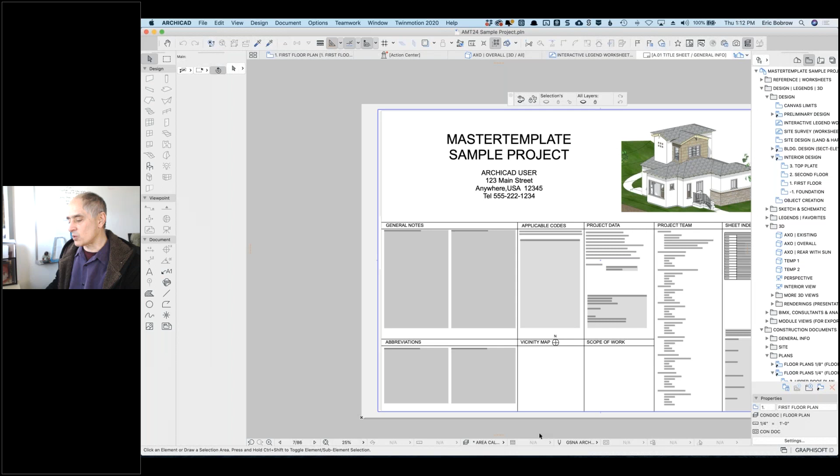What do we have down here? We have a set of interface elements that are common regardless of whether we're in a plan or in a layout, or let's say they are similar. You can see in a layout, some of these things are gray. If we're in 3D, there's also going to be some other things that are gray. So the interface changes depending upon what context you're in.

Now, in the bottom left area, there's some navigation things, like being able to click and zoom in to an area. That's the little plus sign, or click here to fit in window. So these are some navigation tools and some ability to switch your scale. For example, 100%, you can see how it got bigger, and I can have saved views as well.

Now, if you want to rotate your view, you can set the orientation. Let me just zoom out a little bit. If part of the building was on a 45-degree angle or something like that, you could set it graphically. It says enter rotation center point, and maybe I click on 2 points and then rotate them. More often you would take something that's off the angle and rotate it to be square. This allows me to draw with the X and Y related to what's on screen.

Yeah, Eric, I have a new project that I'm going to need this, and I don't know exactly what the angle is, so I can do this manually. I'm assuming, but I would need something in the background. I actually have a site survey, but it doesn't have... well, it would have, yeah, it's going to have one common property line that I could probably use to align with.

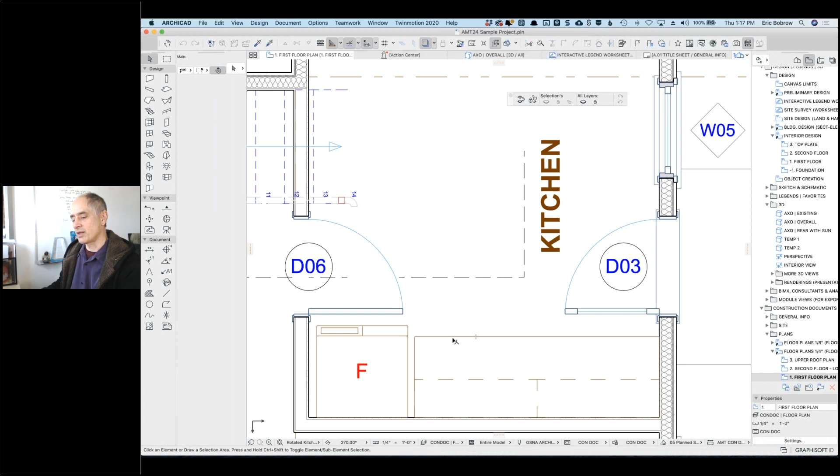Now, by the way, if I do fit-in window now, you can see I am still rotated into this orientation. So the fit-in window will keep the orientation to 270 in this case.

Yeah, I understand. So let me put it back to the kitchen view, which puts me back at the 0 orientation, and then fit in window, just so we see what I'm used to seeing here. Now the rest of the tabs down here, well, there's a scale factor, and right now we're at 1/4 inch to a foot.

And as most of you know, if you were to make this at 1/2 inch to a foot, everything would get twice as big, but the text and other paper elements would not change.

So if I change it to 1/2 inch, look what happens to the marker bubbles and the window and door markers here and the grid markers. They will stay the same size on screen, but the building will get twice as big.

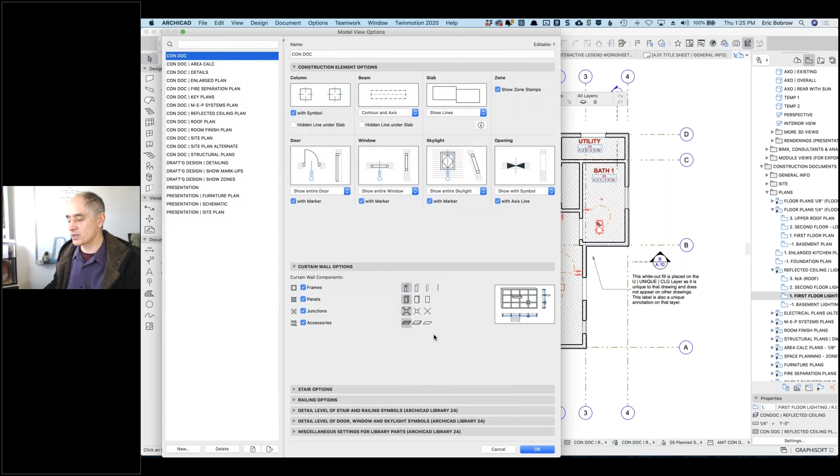Well, let's talk a little bit just as general interface controls. Right now, I've opened up the model view options. I can switch between any of these presets here. Let me just cancel out of this—I can also do that from this little pop-up. You can see we're on the reflected ceiling plan. I can switch it to condoc, and we'll see all of a sudden we're still seeing the ceiling elements, but now we're seeing the door swings, the details of the windows, etc. Now this model view options, while I can open up and just switch to different ones here, I can also modify it.

Maybe for the ceiling plan, I don't know why we'd want to, but maybe with the contour, we say we don't want to show the markers. That's modifying this preset to turn that off or on. So we can modify the presets, or we can select a different preset.

Now, when I select a different preset, like this here, this is just temporary. If I double click on this view, it puts it back to the other style because the view has settings. This view in the list has some settings when I clicked on the settings button, and one of them was model view options, use this style.

Ultimately, Roger, I know you've been around for a long time. You will have worked with model view options, I'm sure, and you certainly have worked with layers there. All of these are incorporated into the view settings. So if you want to create a drawing that looks a certain way and has the right information, typically you're going to create a view with a name that makes sense, so when you look at it in the list, it's easy to understand.

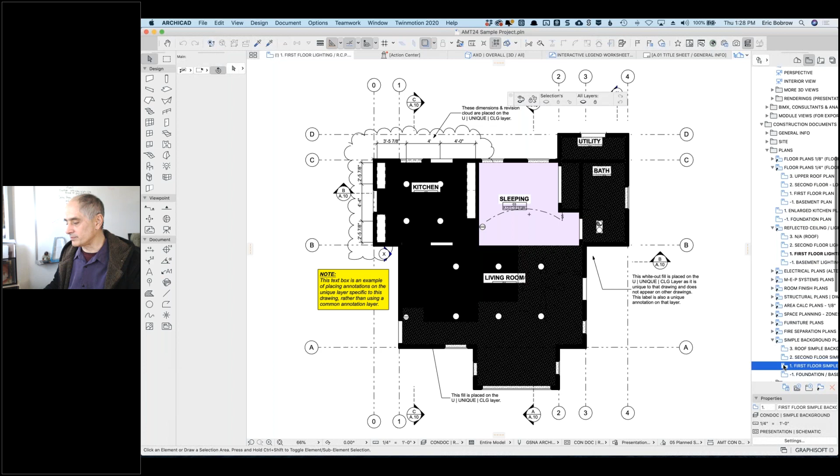But let's look at something that might be a simple background plan. This is another example where this particular view turns on a layer combination that hides most things. It's just intended to show the shell of the building and some of the key structural components.

There, it's got a setting for the graphic override that says make the certain fills just white. It also has some things that change the pen set to blue. That's what gave the blue thing. Now if I just change this to presentation solid, we're going to see another graphic override.

So without going into an extensive explanation of all of the system there, each view defines a bunch of different styles for what to show, how to show it, and scale and other controls. That's what these things down here do. They either give you access to just the dialog box when you click on the icon, or to a choice of one of the dialog choices.

These are manual settings. In other words, you just say, I'd like to see this, I'd like to see that. But when you have a view, and I go back, let's say to the first floor plan view, it set all of these to give us something that makes sense. So does that help clear things up?

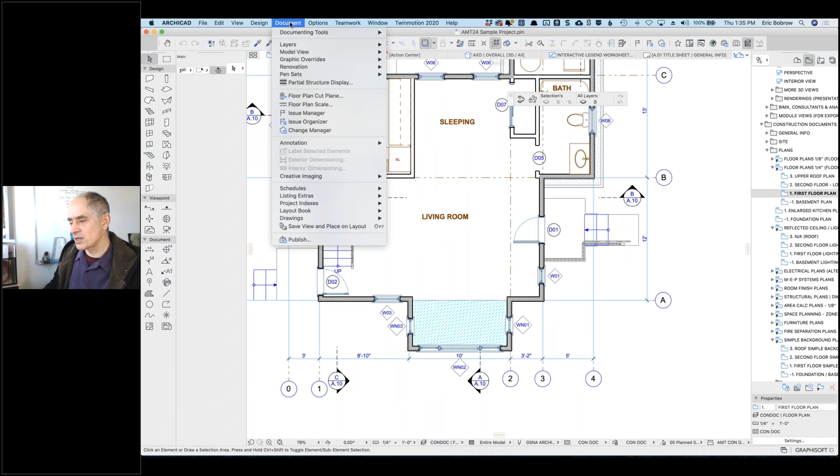And let's see, under document — let's see, it's under view — set rotated grid. There are grids that you can rotate. I'm not sure the rotated view is here. There's also the pop-up.

I'm not sure, but I think those are the main places where we'd look at it. I don't think it's under guidelines or snap, but this is the place where I know you can set that.

Good question, Emil. Now I do see some questions typed in the Slack workspace for our coaching program members that relate to this, so I'll try to take them before I move on to other questions.

Stan says, my site plan was brought in at 0 degrees and I designed within that site plan, but rotated the house plan 1.14 degrees. Whenever I click on any object, it says it is rotated 1.14 degrees, although it is actually normal or 0 to my house plan. Also, I believe there are other anomalies in my sections that may be due to this.

Albert says there may be a better way to initially set this relationship up.

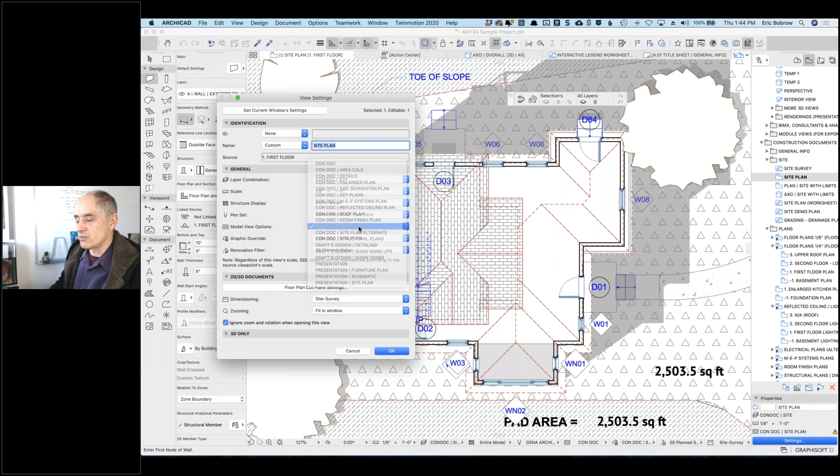You want to set up a view. So for example, I've just manually switched it to condoc. As I do this, look at what happens to the doors and windows. We're seeing all these markers here for them on the site plan, which we wouldn't want. So the site plan has a setting that says the model view option should be specific, designed to work for site plans. And if I say okay, you can see how it switches to this setting. So that's the first answer to the first question you had, which is how to hide or not hide.

Now, you talked about the window and door markers, right? Okay, now section markers are different. Section markers are visible if the layer is turned on. So controlling what is seen can be managed in some cases by layers and in some cases by model view options. And graphic overrides also have a somewhat similar control of how you're seeing things.

So let's just look at the section markers. So section markers are not showing here, right? Why? Because in the layer combination, and I'm using a little icon here to open it up, we're on a layer combination called Condoc Site, and the layers for the markers here are hidden. You can see the eyeball. Whereas on a floor plan, we're showing the section markers and we're showing worksheet markers. When we have an enlarged plan, we may turn some of these off, or we do other things here. It will hide or show the layers.

So the layers are going to control this. Now, what makes a site plan is in part the layers, because we're showing trees and we're showing some graphics indicating shadows, and we're showing some site area information. Those are mainly controlled by layers. The fact that we don't have door and window markers is controlled by the model view options. So that's some things there.

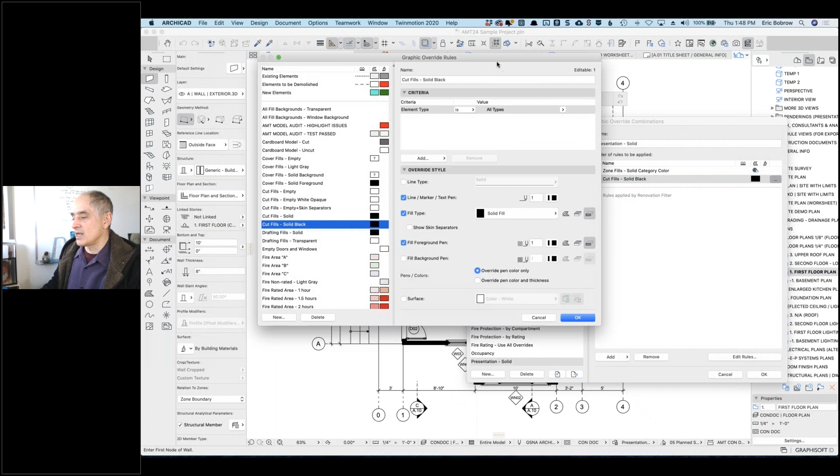Well, if I click on this 3-dot symbol, this is called a graphic override rule, whereas this is a combination of one or more rules. In this rule, it says anything that is drawn that has a fill, let's make it solid, and let's make that solid fill be pen 1 black. So that's what this is.

Now, if I use something like cut fill solid here, this does not override the color. Let me just say, actually, I can switch these to look at them, but it's the combination that's being active. Let me just show you if I change to another combination, we have white model here.

Actually, no, let's see, simplified drawing. Okay, so simplified drawing, this is going to change the cut fills to empty, white, opaque. So they'll be white, but they'll also block anything underneath.

So let me just switch that. So you can see how that had different rules doing things, whereas normally when we're doing a construction document, we have no overrides or just a minimal one about zones. And now we can see that we've got the insulation, etc.

So that's graphic overrides. Now, when we have the renovation filter, plan status says show things normally, but only existing and new elements and not the demo. New construction is overriding things that are new here, and that's what I was demonstrating earlier.

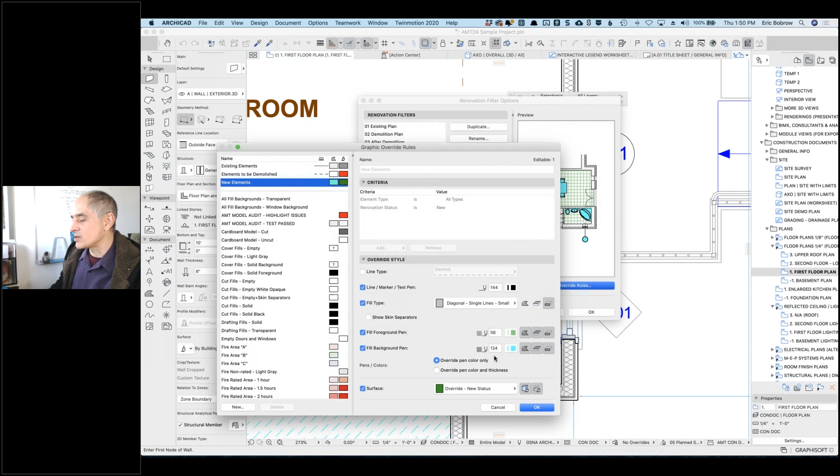So let me just show you how this works. I'll just activate the new construction one saying that I'd like to show the new stuff in a special way. And you can see how it's highlighting that.

Now this new construction here, if I go to graphic override rules, is controlled by this setting. And if I were to make this a different color, let's just go and make it fuchsia or whatever that color is, and say okay, you can see here's the preview and there's the thing there.

So first of all, I'm saying that I'd like to highlight these things or override them in a graphic view. Let me just put this back to something, I think it was probably this one. Was it that? I don't know, it was probably this one here.

All right, so when you changed it, you must have changed it here, and then you went to no overrides. So this is no individual overrides, and this has to do with the phasing that has some overrides. So just put it back to either plan status or existing plan, depending on which way you designated elements. So that fixes that issue.

Okay, now let's see. Oh, yeah, okay. All right, okay.

Okay, so I think we've covered the basic things that you brought up. Is that all right if we move on?

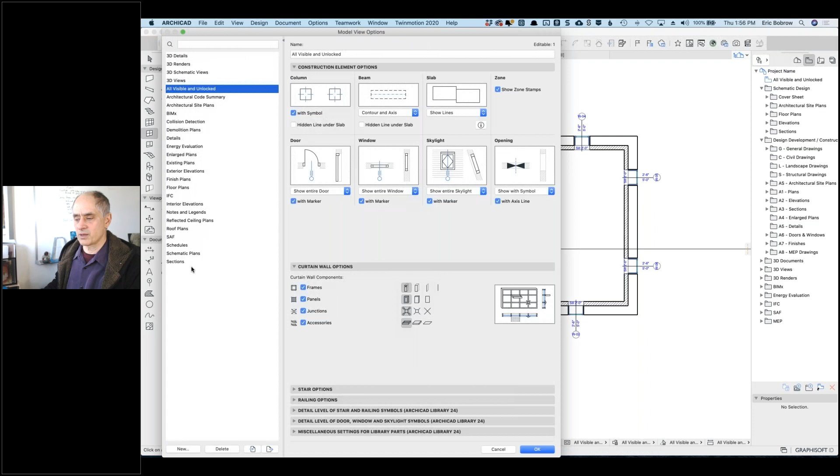Now I'm going to switch back and forth, and I think I can actually show this. So here's master template, and here's what the Graphisoft ones in the US are. Now it looks like they have more, but actually a lot of them are identical, and they really have nothing to do with drawings.

What they've done, as a philosophy, is to say: if we have a layer combination that says all visible and unlocked, then how would we like the model to show up? How would we like the graphic overrides to be? How would we like the renovation filter to be? They basically gave a name for each one - the same thing, all visible and unlocked, same thing for architectural site plans, same thing for BIMX, same thing for existing plans, etc. So they've got a set for all of these different styles.

And then you can say, well, when I want to have an existing plan, this is how I want it - you go into every one of those graphic overrides and renovation filters, etc., and set it up. Problem is, in the renovation filters, you don't have 20 different renovation states.

You only have 5 to 8, depending upon what you need, that you're going to control. I have a somewhat simpler system here, but if you don't see what I'm showing, you may be outside the US with a different setting. You can create a new one, give it a name, and go through this to create them. Or, if this project doesn't have it and another one does, we can select a bunch of these and export them using this export button. This will save a file onto your computer, or a folder with a number of files. Then in your other project, you can import it using this button here. So that's an explanation of why things can be different - it's based on different templates you start out with. A little bit about my philosophy there, and then the mechanics of creating new ones or exporting and importing things. Hopefully that helps you, Stephanie.

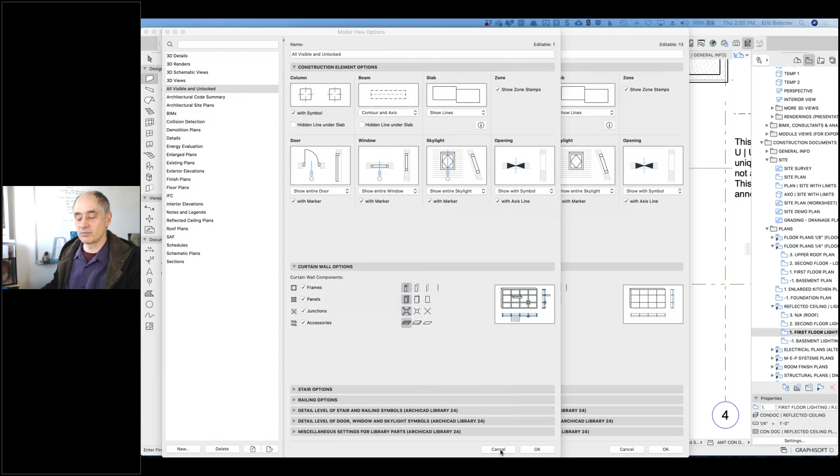Eric Reinhardt says, thank you, I'm the explainer in chief. Well, that's why they pay me the big bucks, right?

Marek Krukowski, haven't seen you for a while - how to save a custom skylight, doesn't seem to have this option, just window or door. I'm just going to give you a hint: it has to do with creating an object and then changing the subtype to skylight. Let's see if I can get back to demonstrate that, because other people have sent in questions ahead of time.

Robin Wilson, I have this file open here that I just did as a quick test. Let's open up your line - you are under Peter Wilson. All right, so Peter Robin Wilson, your line is open. You have to click on the microphone icon to make it come alive. Sorry, yes, hello, thank you.

Hey there, so where are you calling in from? I'm from the UK, Harrogate, North Yorkshire. Okay, excellent, well, glad to have you here. So you sent in a question.

You do a lot of stone barn conversions where you have 500 millimeter thick walls, about 18-19 inches, with concrete, and you line them with a concrete block wall with a full fill insulated cavity. You do this as a separate new proposed wall and leave the existing wall as existing. One problem is that when making new window and door openings, the opening only appears in the existing wall, and then you have to align and add a separate empty opening in the new lining wall. As for alterations, it can get very tedious. So I'm going to show you a method using the new opening tool, introduced I think in ArchiCAD 24. What version are you on? I've got 24. All right, so you'll have this option. You asked, should you create a new proposed wall that includes the existing wall construction - essentially both, by duplicating the wall - or should you have a new liner wall, demo the existing wall? How do you deal with something where you're just adding cladding to the structure, not deleting the framing or original thing? There are different approaches. I'll show you two common ones, and there are trade-offs - nothing is perfect. But first, what do we see here? If we look in 3D, it's nothing much at all.

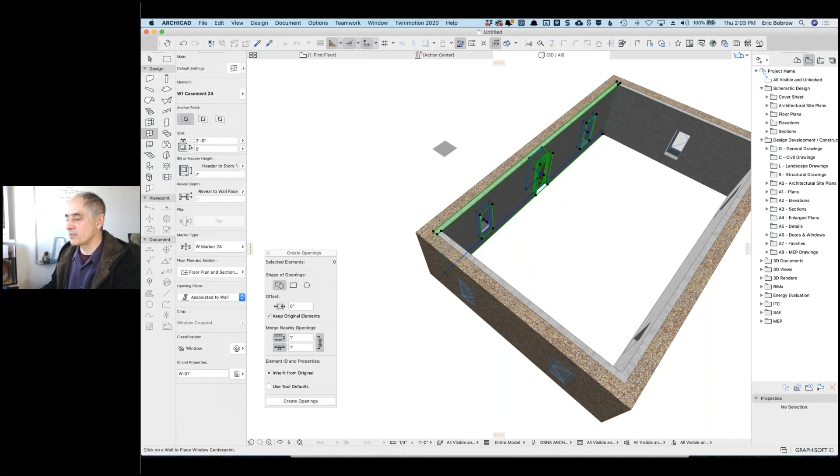If I were to say show only what's selected here, now it looks like I actually had the other one selected. Let me just say show only what's selected there. So this is just one wall. And what do we have? Just openings, okay? Looked like we were seeing the windows and doors, but they are actually part of the other wall.

So let's just say show all in 3D here. Now, how did I do this? And what are the trade-offs of what we have? So let me sort of start over.

I'm going to take these 4 walls here and delete them. This is what I started with, just as a little test. So you can see here is a very thick wall with just some windows and doors placed in there.

Now I'm going to go to the wall tool, and I've got it set for masonry, and I set it for 8 inches thick. I didn't know how thick the lining was, so I just gave it a rough value. How thick would it be in millimeters? Just a 100mm block. Okay, that would be roughly 4 inches. All right, so let me make it 4 inches here.

Okay, so now I'm putting it on a different layer, not the exterior wall layer. I'm putting it on partitions, and we'll talk a little bit about that in a minute, that would be useful. But I'll just go here and draw this in.

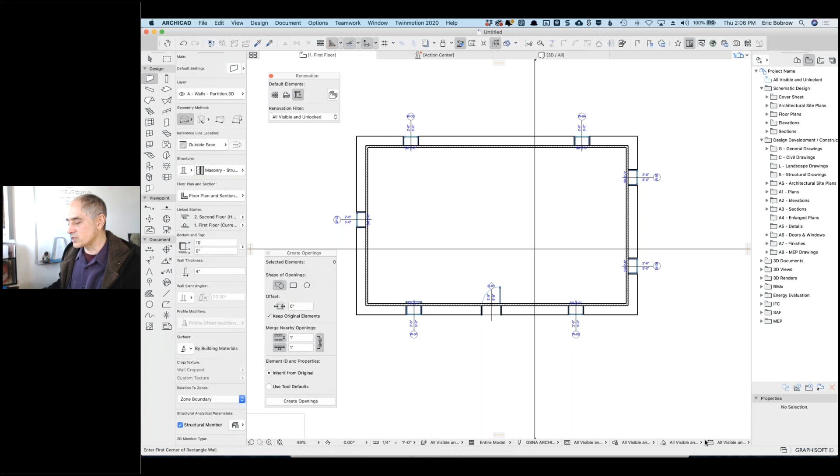So now that I've done that very basic thing, I can switch to the renovation things and say, well, if I go to existing plans, the interior walls disappear. But one of the things about this Graphisoft US template is when I show the existing plans, why is it doing an override to make it dotted like that? I think that's crazy, maybe is one word you could describe it.

I'll say, you know, when I'm showing existing plans, I don't want to override it. I just want to show the existing walls, right? And existing would also have demo elements, and I'm going to hide the new stuff. All right, so here's existing, and here is the floor plans as they finish.

So this is Graphisoft US's way of saying, well, the floor plans are the final result. Well, the doors and windows are not showing here. Let me just fix this one here. I use the renovation palette. Yeah, so I figured you had that. So this is one way to do it.

Now, one issue when you're doing this is, of course, that the openings aren't going to show here. Now there is an option—if I select this window here, let me close this palette, I'll show you how you bring it up. If I right-click when I have a window selected, or multiple windows, I can go to connect, and there's an option that says create openings from selection. Oh, now this brings up a palette.

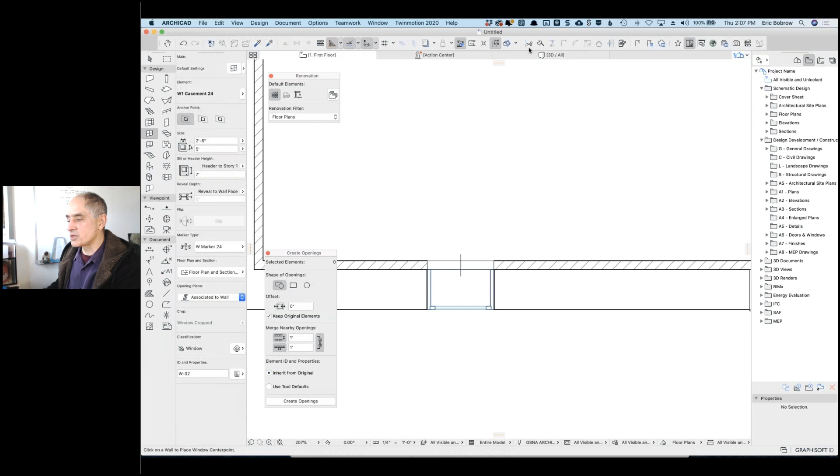It doesn't immediately create an opening, but it allows you to then say I'd like to create it. There are some controls as to how the opening is sized here. I'll say create opening, and you can see how it popped an opening in here. So let me go now to 3D, and we'll see there's the one opening that I did. All the other ones are not right here.

So what I'll do is I'll go to the window tool. Actually, I don't need to open it up. I'll just select all the windows.

And for good measure, I'll go to the door tool and select all the doors because there's just one here. And I'll use this create openings, and you can see the window openings just all appeared.

I'll just undo it, you can see they've disappeared. I'll redo, you can see them. Now the door didn't quite work, and I'm going to explain why the door didn't work even though it was selected.

So we'll go back down to the floor plan. The door here, if I just select this one wall and just show that one wall in 3D, the door here is, I believe it's flush. Oh no, it is actually, it does have some casing out here.

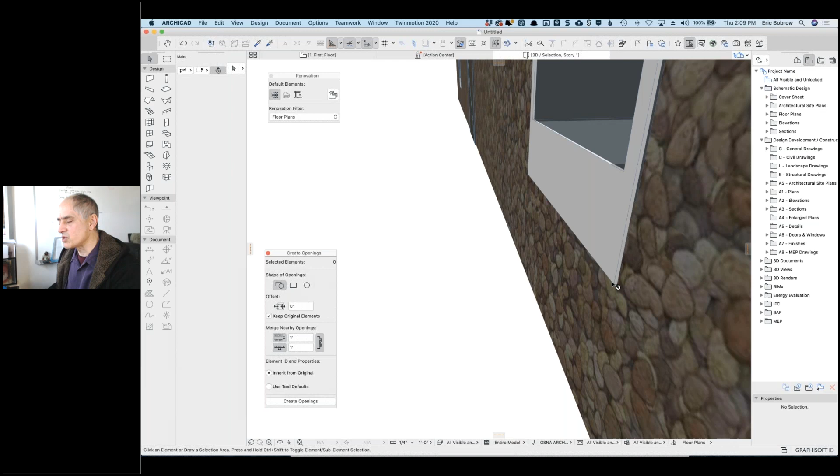I know with windows, one of the issues you have to have in order to be able to have it cut the hole is you have to have it sticking into the other wall. So in this case, I added some trim or casing just to stick it in, get it into the other wall. So when you say create an opening, it'll say, oh, you're touching that other wall.

Now with the door, I haven't experimented with this too much, but I'm going to show you something. If I select the door here and say create openings, actually, do I do it there? Connect, create openings from selection here. Go to the opening tool.

There's the opening. Okay, so I'm going to try to explain this so it's clear. I think there were some things that were already being drawn here. Let me get rid of this. All right, so right now, this is just a normal door, and of course it's got this wall blocking it there.

If I say connect, create openings from selection, create openings, you can see when I said create openings, it created this extra opening. I think that has to do with the tolerance or the shim space that was there.

But now if I select this opening here, it's actually - an opening is just literally a void with a certain size, and it can be rectangular or oval shape, etc. Now this opening, now that it's selected here, I can create an opening in adjoining things. I guess, what is it?

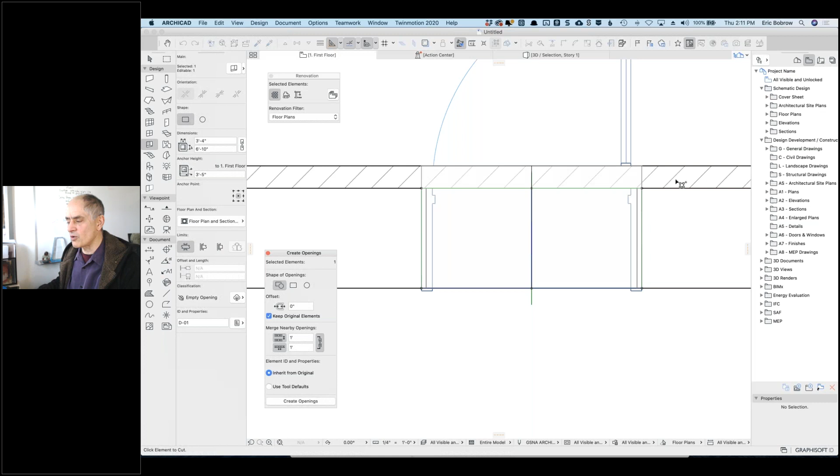Connect, cut additional element with opening. So I haven't done this enough to know all of the ins and outs, but basically this gives me the option of saying I'd like to add it to this wall. You notice how the wall highlighted, if I move away from it, it disappears. Move it over there and I tap on it, and now it has cut a hole in there.

So the windows will cut if their trim goes into the other wall, and you just use create openings, and you can do all the windows at once. The door, I think in theory it should do that. In this case, I found I had to create a separate opening and then use the option to extend it.

Now let's just look at this in 3D a little bit more. So show all in 3D here. There, if I go to the opening tool and I say select all openings, you can see there are these green areas. These are not windows or doors.

These are just cutouts in the interior space there. Another way that you can visualize, do you have openings there, what are they doing, is you can go in 3D, under the view, on-screen view options, you can say show the opening cutting bodies. And what does this mean? It's going to show openings and what they're cutting through.

So you can see there's this sort of odd looking thing that says, I'm going to cut through on both sides. This is just purely for visualization, so it's on screen only. It doesn't affect anything about your documents there.

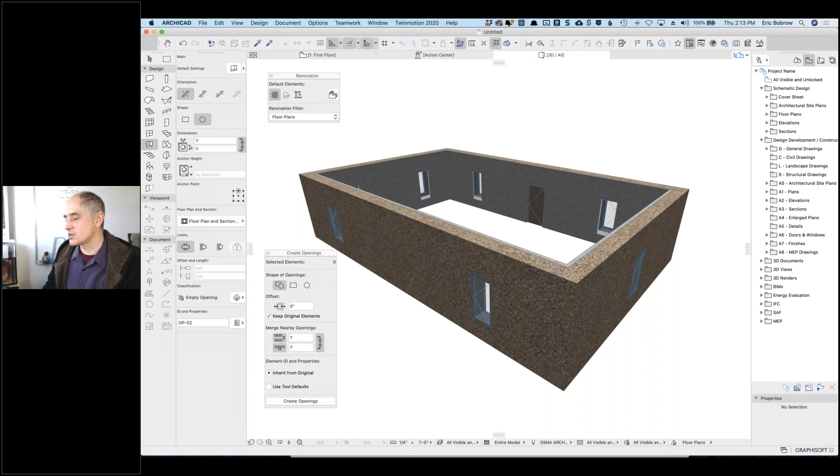But he does that as a separate thin wall that he applies on the outside of all his normal walls. Well, then how do you get the windows and doors to show through? He said just select all the windows, as long as they have a little bit of trim or casing going out into the volume of the separate wall, you can then say cut openings automatically, and in a split second you're done.

That is the basic way I would approach it. Now I'm going to show you a couple of things here. We've got the floor plan in the renovation filter, and we're seeing this in a fairly decent way of representing it. Let me go to existing plans, and you can see we've got the existing without the interior stuff. Now the markers showing the numbers for doors and windows and details are currently turned on in this, and they're not turned on in the finished version here.

I'm going to show you where that's controlled, but I'll also show you where we have demolition plans. So the demolition plan in this case—why is the demolition plan not even showing? This is the Graphisoft one. In a demo plan, we want to show the demo. Actually, no, there is no demo. That's why this is just adding. You made it. Okay, all right.

Now let's just do another way that we could represent this. Let me just drag a copy of this down there. And then let's say that we're going to have a composite that represents the new version here. So this is, I have it as 1'6" stone exterior. So let me go and create under composites. I'll just create a new one. Let's see, new one here.

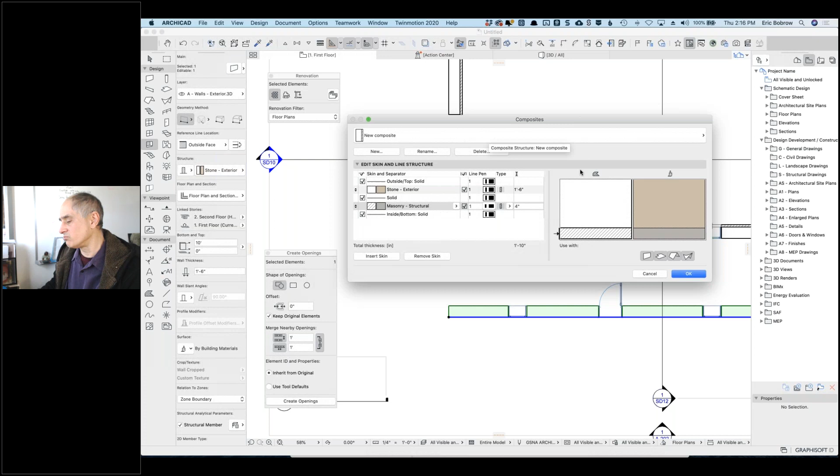If I were to switch this wall to a composite and use the one that is the new composite—so now let me copy this, undo back a couple of steps. And then paste in, these elements will be skipped. Now let's switch this to floor plans, the new element, floor plans. Interesting. All right, well, let me just—I'm not sure what I was just doing there.

Let me drag a copy of this down, and we'll switch this one to the composite that I just defined. Is that the one that I did? Yeah, okay. All right, so now this one we're going to designate as new, and we're going to designate this as demo, because it's going to disappear. And let me switch now to the existing—well, here I'm going to say show all visible and unlock. This is where I can now overlap these easily.

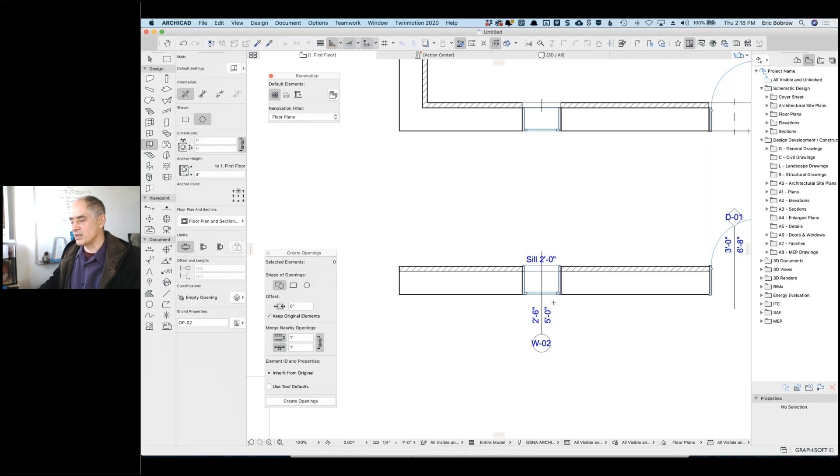So now when I show the existing plans, I've got this, and when I go to the new floor plans, I've got that. So the difference here is that this is one wall with one window, and that's 2 walls with a window and an opening. Now the window maybe hasn't changed, and right now these are 2 different windows because I have 2 different walls. So if you're doing a schedule, you'd have to say that windows in existing walls don't show, only the windows in the new walls show, or vice versa.

So this would be our 2 main options: to actually have 2 copies of the wall, one in its original form and one with a new cladding. Now, the trade-off is that in some cases you're going to do other types of demos. If we have a demo plan, it's showing that this is being demoed. Of course, it's not being demoed, it's being added onto. So that's the trade-off here, whereas the demo plan doesn't show this change happening. This is still there, and when we go to the new version here, we have the new stuff added.

Does that make sense? Yes, that's good. Could you just not demo it and just leave it? You'd have an existing—well, then you'd have two copies. That's what I have here. This is existing to remain here, and this is new. They're two separate ones. But if you had them on, we go back to the one that was existing here. So we're not demoing this. We're actually—I've made it demo so that we wouldn't have two copies of it.

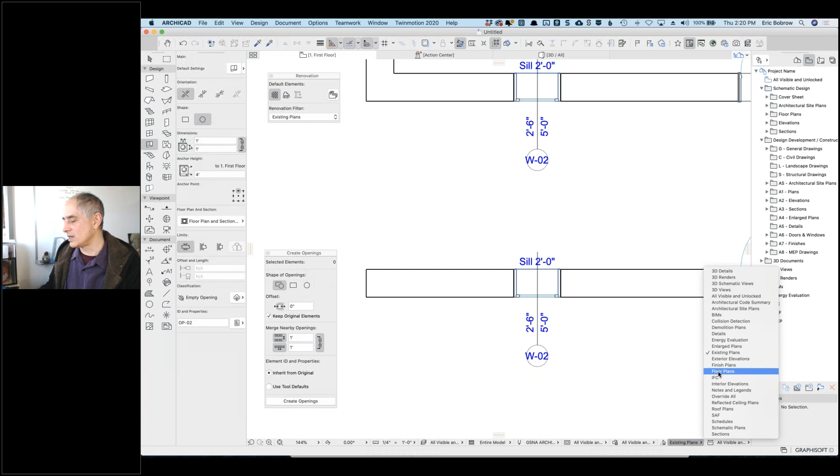So now if I go to the floor plans here, we can see that this opening is as big as the window was there. Now I can actually take this opening and stretch it. Let's see, this is... let me see, this is opening. If I go to the side here, use the option there. All right, so now this opening is wrapped around here because the opening isn't as big. Let's go to 3D, and this window here is what we just did.

And so you can see now the original window frame, and then this is the interior brought in, as opposed to - let me just go over to the other one here. And this one, you know, we have this extra trim. So there are some compromises there.

I'm not quite sure. I know that you can take this window and say that the window actually sticks through. If we go to frame, instead of being the thickness of the original wall, I can make it thicker. But there are going to be some compromises with that. You can see how it's now sticking out to the face, continuous. But then we have this issue of the casing or whatever.

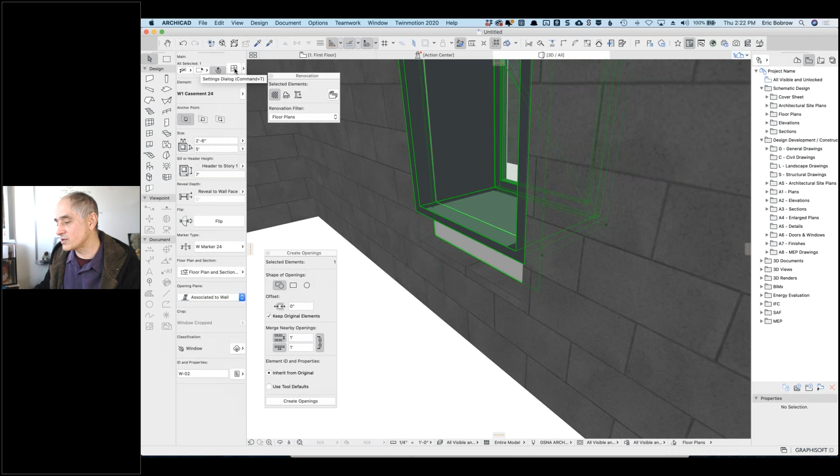I don't know of a way to get this casing out to the outside. I played around with it, and I didn't see an option for that. It may be a limitation in Graphisoft's implementation, but in this case, if I were to turn off the casing once I've got the opening defined - so if we go here to casing and say turn it off here - now we don't have that issue. I do have the opening a little too big here. You can see, and I can take it and again make the opening smaller and snap it probably to something. So there are challenges to this.

So those are the two things that I know about. One would be the two elements and coordinating holes there, and the other is the two versions of the element. I'll have to play around to see if I can deal with the finishes on the inside of the reveals. So it's a compromise, and you just have to push one version or the other as far as you need to go to get it to work.

And the second system is easier, I think, but less labor intensive. But then the model's a bit odd because you're not demolishing existing walls when you're not - exactly, yeah. So you're going to have some things.

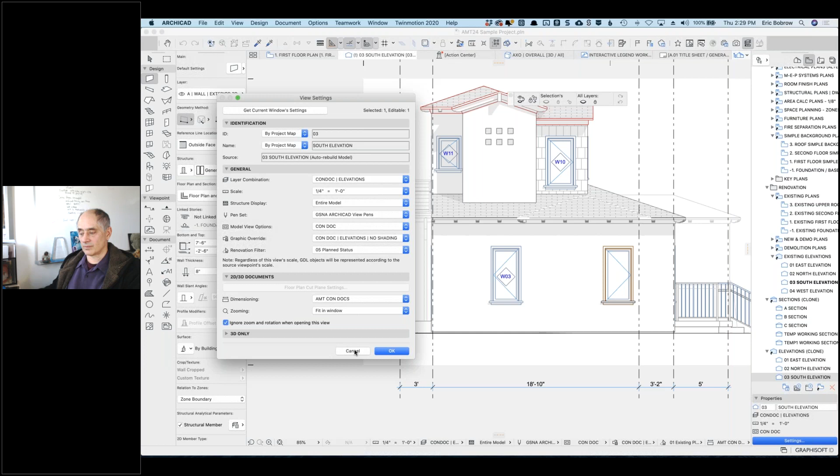Okay, to get the dotted line to show the walls demolished in the dotted line, like you showed earlier. Right, I'll try that. Yeah, if I go to my plan representation,

and we go here to show the demo plan. Okay, so what is going on here? Well, it hid the extension. It's showing the stuff that's being removed in this override. If we go into the renovation filters, demolition plan says, show these elements to be demolished, but with a different style, and hide the new stuff.

Now, if I go to the graphic override rules, this is in master template, but all Graphisoft templates will have something that says, how do you want demo elements to be shown when they are overridden, when you choose to override them? And in this case, I've got it set as make them red. They might be black, they might be blue, they might be any other color, and make them dashed. Those are the main things. And in 3D, it's actually going to show as a bright red color.

That's what happened. Yeah, well, so this is something. If you have the graphic, I didn't want it in red because it was blotting out the proposed. Right, so

when you're going to the proposed, you want to not use the one that says demo plan. In the elevation or the 3D view, you want to use one of these ones that shows just the new building and it doesn't show that.

All right, so let us see here. What am I going to? All right, so Robin there. Okay, so let's get rid of some of this.

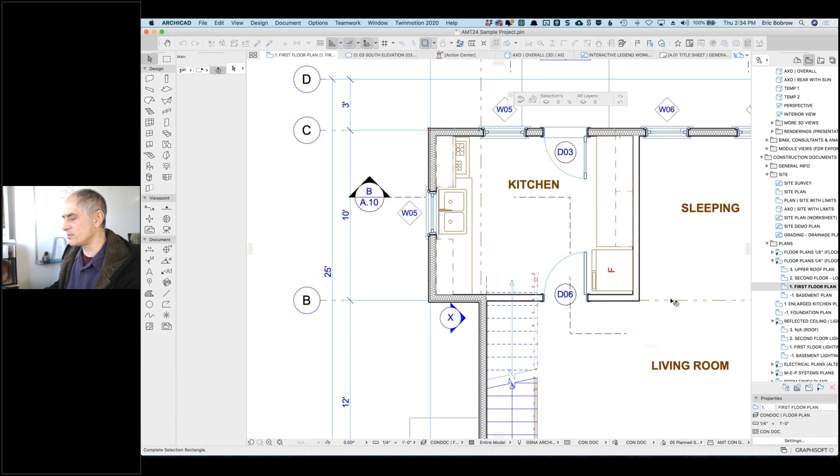If I go and draw a box around this, I've got a bunch of elements here that I've selected manually with the arrow tool. Go to move, mirror, a copy, go along a line here straight, and we're going to see that now the sink is on the right as compared to the left, the refrigerator is on the left as opposed to the right. So we flipped it - I did only the elements that were selected, so I didn't have multiple stories, I didn't have the rest of the building. So it's a start, but we generally want to get a whole building or at least a good part of the building.

So how do we get the whole building to work with, and how do we avoid things like, well, maybe you do want the section markers and things to show up. Let's see, I'll undo this. So the basic way I'd approach this is instead of using the arrow tool, I'd use the marquee tool, draw a marquee around the whole thing I want to affect. Instead of using the thin marquee, which would only affect one story, I use the thick marquee to say I'd like to select all of the elements on multiple stories, and I can still use the mirror copy.

Now, when I did that, it is doing that on other stories, so that's a little warning, but I'll say yeah, that's exactly what I want, do continue please. And we'll see that everything is now flipped - we can see the bathroom is on the left side as opposed to the right, etc. Now, text did not get reversed, markers did not all of a sudden become mirror image, but everything in terms of building components is flipped.

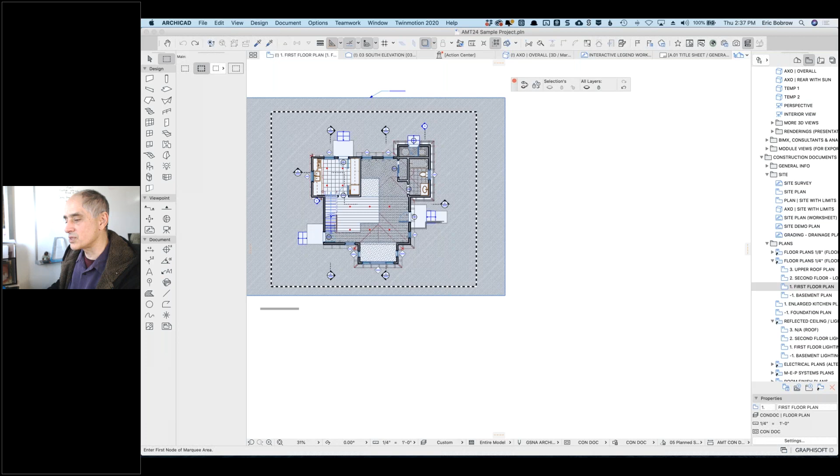And maybe we don't want the landscaping, we don't want the shadows here, we'll hide those. And I don't know what this is, just a graphic fill, we'll hide those too. All right, so now that looks like a pretty clear set of layers that was building and site minus some of the site stuff. Now I'll go and again, mirror a copy.

Now I think I didn't do it quite square, but that's all right. It won't be a square copy, but it will be coherently done. If I go to 3D, and we'll just do show all in 3D here, we're seeing now we have two roughly mirror image buildings. I didn't quite do it square, but you can see what it did. Does that make sense? Yeah, that was a lot easier than I thought it was going to be.

Okay, so this allows you to also just move a building on a site. Just make sure you have all the layers turned on that relate to the building. Maybe turn off the layer for the site if you don't want to move the site itself, and use the heavy marquee. Then, in that case, it would just be drag as opposed to mirror a copy.

Yeah, excellent. Thank you. Thank you, Eric. Appreciate it. You're welcome. Yeah.

Okay, so Doug Muir says, you have a trick to have items not count in schedules. Is that relevant to doubled openings? Yeah, so Doug, the answer is that whenever you have a schedule, you're telling ArchiCAD what you want to be listed. And I'll give you an example here. Let me just undo all of this here.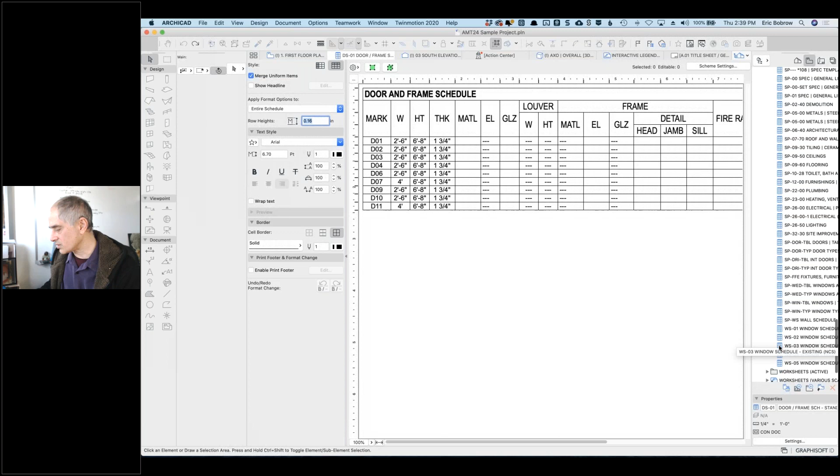So if I go to schedules, active. All right, schedules here. So we'll do door frame schedule standard here. All right, so these are all the doors. Let's go to Windows, let's do Windows schedule here. Okay, all right, you see this says new Windows schedule, and this one has all windows. Well, what's the difference?

In addition to some of the contents of it, under the scheme, we're saying, hey, I'd like to show all window types that are existing here. Now, if I go into this one and we go to scheme settings, actually that's the wrong one there. I want this one, this is the new window schedule. The scheme says renovation status is new.

So this is one option, is you can say that things that you want to have listed are only the new ones, the existing ones are not relevant, we don't need to list them. You can do different things.

Now, the openings that I created in the version a few minutes ago, where we had windows and then I said create openings, those are openings, they're not actually windows. So when we say, what are we listing here? We're not listing openings, we're listing window types. So those openings wouldn't show up.

But on the other hand, when we had the version where there were two different versions of the wall, one plain and one lined, the ones that are lined, well that's the new version of the wall. And if it's a new version of the wall, then the windows are new. If you have the existing or demo element, that is the original version, then those windows would be considered existing or demo. So basically, you would just have in the schedule what do you want to have, what do you want to list there. So that gives you a little guide for that, Doug.

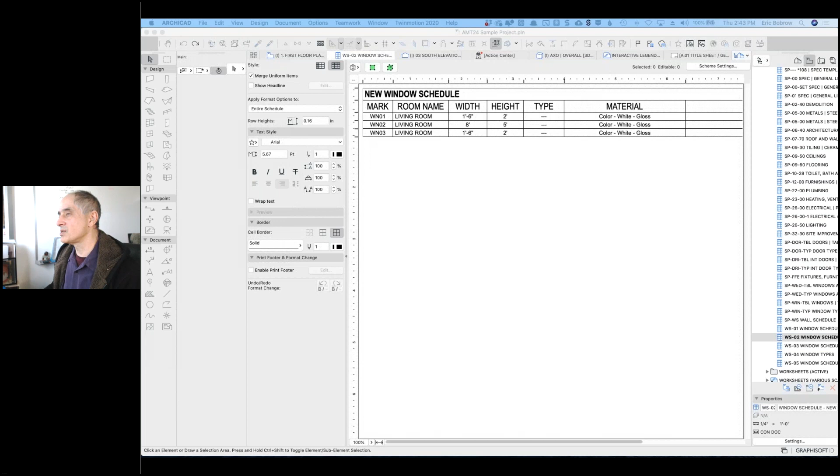I can't demonstrate too much on it, or let's say it's going to take a while to demonstrate too much, but let's just at least see if I can show a couple of things. So Tom Palmer, I have opened up your line. Are you there, Tom? You'll have to click the microphone icon if you are sitting at your desk. All right, Tom, if you can type in and let me know that you're here. Of course, Tom might have stepped away from his desk, so in which case I can come back to him.

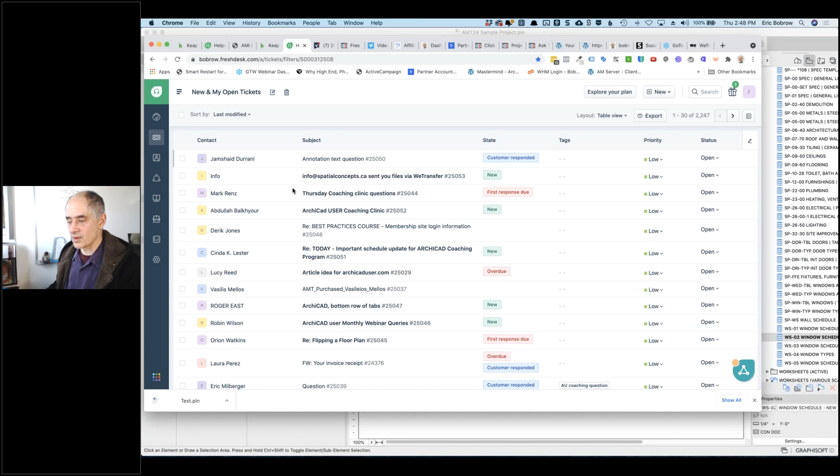Jamshaid, Mark Renz. Okay, Mark Renz, are you here? Mark Wallace, I do not see Mark Renz. Striking out here, three in a row that at least people have sent in things. Okay, but Mark Renz, if you are there under another name, then type into the chat. Okay, oh, here's this WeTransfer, right? Okay, Mark Renz. Abdullah.

Okay, so I think this is, have an issue with ArchiCAD rendering engine. Okay, render stuff is going to take a while. I don't know if Abdullah is on here. I don't see him. So, all right, we'll deal with that separately.

So Eric Milberger, Tom Palmer, Jerry - we did do the Jerry thing here. So Conrado, you had a question from - okay, you just wanted to see that recording again. I definitely can do that. And Robert and Doherty, I know you, so these are going back. All right, so let's see.

You had some other questions typed in. Merle, this was from 25 minutes ago: use layers to control what is shown, but with two walls on top of each other, the intersections probably won't work. Okay, so let's take a look at what your point is and see the way to deal with it. So Merle, open up your line here. So Merle, your line is open.

Oh Bob, I was just commenting on the previous example you were having. There you go, yeah, okay.

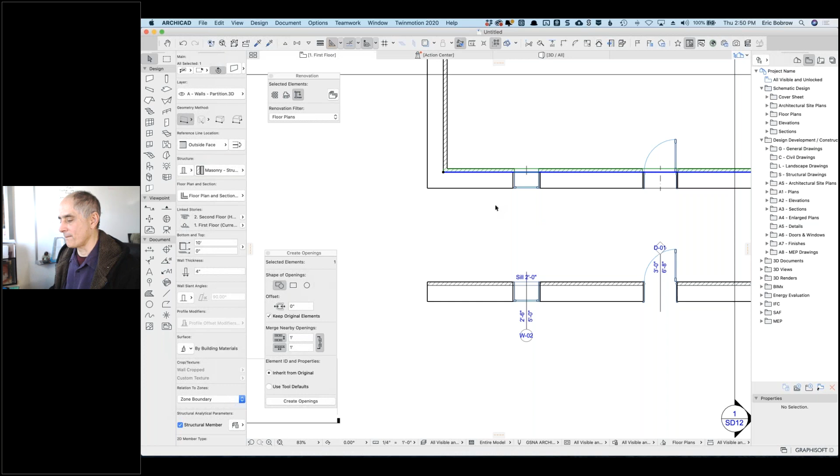So the lower one there, where you have two walls stacked on top of each other, that can be controlled with the layer settings and layer grouping, depending on which you want to show. But when you do a 90-degree intersection on that, they probably won't intersect correctly.

Right, okay, well let's take a look here. I'm going to go to the existing plans, and I'll just copy the settings of this wall, and we'll do just a single wall and flip it here. All right, okay, so we can see a nice clean intersection there.

Now this wall here, I'm going to say it's existing to remain, as opposed to this wall, which is existing to be demoed. Okay, so in the existing plan, they are cleaning up nicely.

Now if I switch this to what it will be here, we have, of course, this issue. This wall is connecting to this wall just fine, but this interior lining is considered stronger than the exterior. So it is cleaning up, but it's cleaning up in an odd way.

Now, your point of what you were saying, things won't necessarily clean up. How do you control it? I want to say that when you hide or show things, I'll demonstrate this in a different way. I know what you're talking about, and it is important to understand that.

Let me put it back to the existing plans here, and let me drag a copy of these. What am I going to do? I'm going to drag a copy of them down just for a different approach.

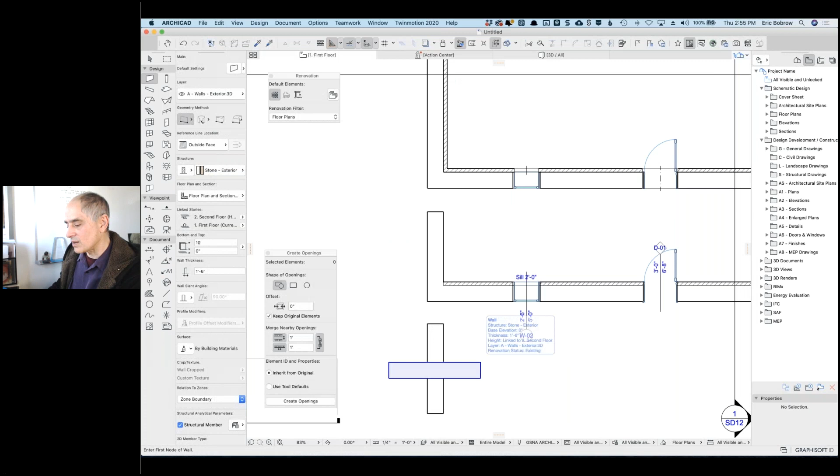If I go to the layers and turn off just say the partition one, just manually turn this off—actually, you know what, to demonstrate the issue, let me put these both on the same, I'll just put them both on here. No, let's put this on interior. Okay, so right now they are intersecting. If I go to the layer dialog and I turn off the interiors, what's going to happen?

We're going to see this gap. Why? Because it's still trying to clean up to the layer that's turned off, whereas this interior layer is hidden, but it's still on one. If I temporarily, or in conjunction with the layer combination, switch this to any other number, like a 2, then...

...it does not try to intersect with it. So I think that's what you were referring to as controls based on layer intersection groups. Is that right? Well, yes, but in your example right now, if you just turn both those wall layers on, you'll still end up with that intersection line going through instead of cleaning up completely. So if you manually turn it on and off, then these won't change.

But if I go to, for example, just floor plans, as soon as I click a layer combination, you notice that it also adjusted the numbers here. So the layer combination will say turn on and off certain layers, and it'll also say adjust the layer intersection priority. Typically when you want to hide the interior walls, you'd have a layer combination like shell only or exterior walls only, and you'd make sure the hidden layers were on a different group.

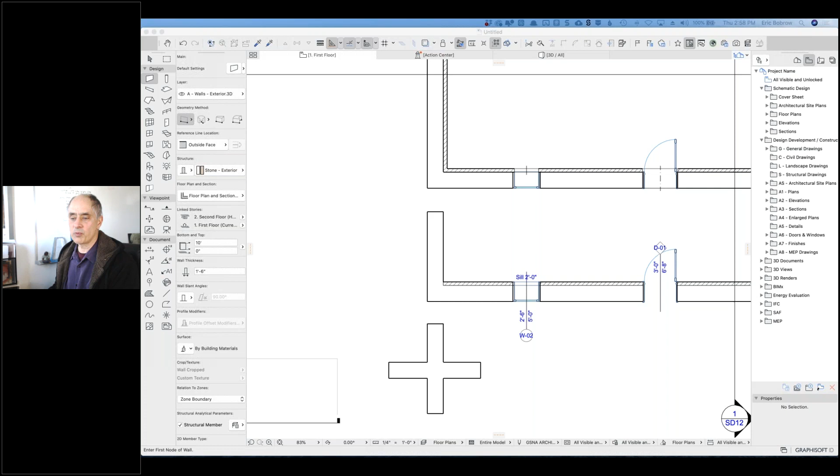Okay, so Alexis says, not a template question, but just about layers. Can I use layers to show zone envelope as a schematic or massing concept while still using normal walls? Can these two systems be toggled using layers?

All right, that's something that I can demonstrate, I think, reasonably well with the other file. And here is what we're going to do. So here is our little building. It looks like a normal little building.

If I go to, let's see, do I have a massing one in here? Not sure—structural plans, area calc, space planning zones. Not sure whether I actually have this in. Oh, you know what? I have it in 3D views. Okay, that's right. It would be in my 3D, more 3D views, cutaway. Let's see here.

We have the massing, cutting planes, large marquee. No, this is see-through and framing. Model framing—interesting, I thought that I would have that in there. Okay, so I'm not sure if it's in there already. So let me just demonstrate what I think you're talking about.

First of all, under the View menu, there are controls for the elements in 3D view, and you can go into Filter and Cut Elements in 3D and say, you know what, I would like to turn off windows and doors. Let's just see what happens there. All right, so now we're seeing just cutouts for them. Well, that's an interesting option.

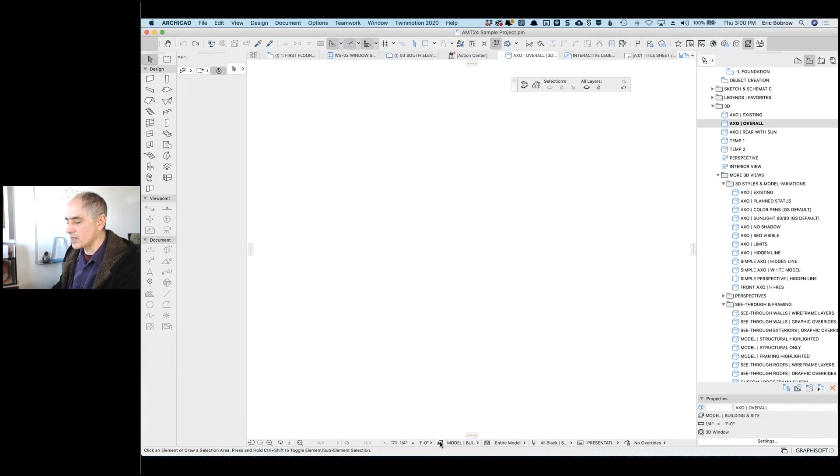Let's go here. So there's a layer for, I don't know whether we'd have something, show zone colors. That'll definitely have zones on here. All right, so what are we seeing here? We're seeing volumes. This one is the bath. This one is the utility area. This one is the second floor, loft, bedroom, etc. Now, these exist on the plan.

If I go down to the plan here, go to do space planning zones.

All right, so what do we have here? Here are our zones. For example, the sleeping zone is this area that's currently highlighted. It's called conditioned space, which gives it a color and category for totaling things up. Let me put it into a different category, like residential here.

Now you can see some changes happen when I change the category to the zone color. But let's go back to that 3D view. And I didn't change that. Okay, so actually the color on the plan is independent.

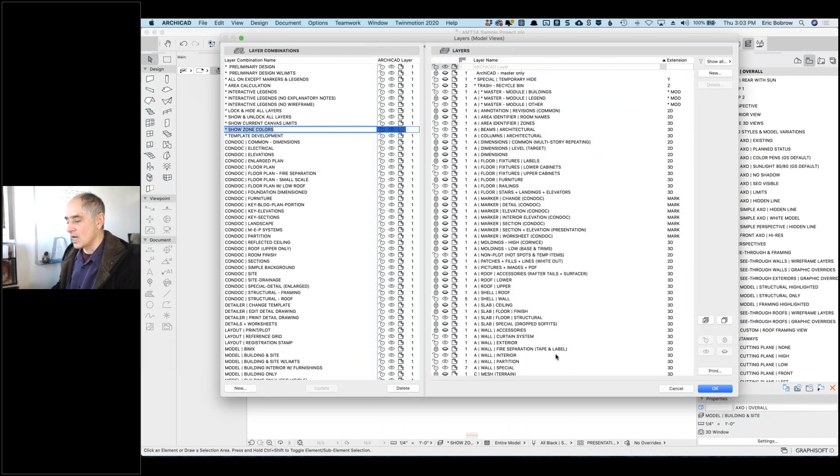And if you wanted to show walls as well, then we could do something like the following. This is sort of an extra little trick here. If I say, let me go and put the exterior walls, actually the layer is on. Let's go to this filter here, and we'll say turn on the walls here.

We've got walls with these zones. You can barely see it. We're not showing the windows and doors, just the openings in it, but it's still hard to see all the massing there. But what we can do is we can use a graphic override.

So right now we've been looking at the filter and cut to choose categories of elements. We've also looked at layers to make sure that the zone layer was turned on as well as the walls. Now we're going to go to the graphic overrides, which is here.

And one of the options that I have in the template is to say see-through walls. So what does this do? This is a rule that I defined in the master template that says if the element type is a wall, make it look like glass. So when I activate this particular graphic override, guess what I have?

I now have something that can show the walls as see-through and see the volumes. And of course right now there's not a whole lot to see, but you'd be able to see different color codes, different volumes with different effects. So I've got a combination of filtering elements, layers always are going to be important, and a graphic override that says if you are showing the walls, just show them in this style, which has a certain surface.

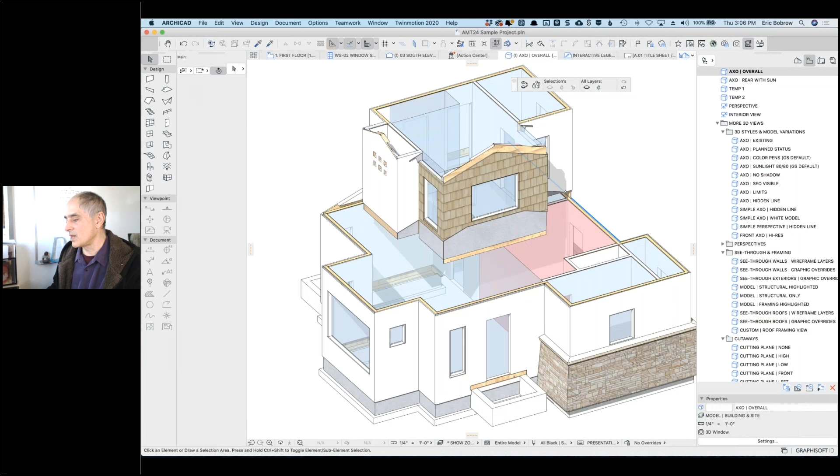So we have no overrides. So now I've got the walls showing like this. There is another option that has been around for eons. And if I go to the layer settings, I can say, for example, that I want this exterior wall layer to be shown in a wireframe.

You can see this little group here. If I click on a different one, you'll see this is a little wireframe icon. When you click on it, it switches and toggles back and forth. So right now I'm saying that I'd like the exterior walls to be showing, but only their outlines.

And I say okay, so this is a slightly different thing. It doesn't make the walls glass, it makes them empty, but just the outlines. So that's definitely available in ArchiCAD 19. The graphic override may or may not be, I can't remember whether they introduced it into 19 or 20.

Okay, so alright. I think, okay, Marek had a question about custom skylights, so we can see if I can answer that. Oh, and Wyatt Powell earlier said something about door schedule types are no longer editable. Is there a way to change door types to show in my door schedule? Okay, so let me see, those are two different questions here.

I still wonder if Wyatt is still on. He asked that earlier. Let me open up your line here. Wyatt, are you there? I'm here, can you hear me?

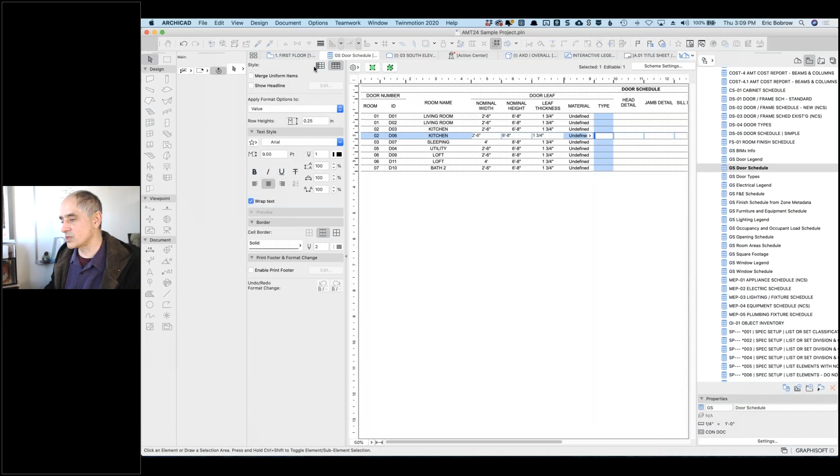So one question is, let's go to the plan and go to the object tool and go to the folders. Do you see folders like this that have CSI categories - concrete, masonry, metal, etc? I'm sorry, where did you go to get there? I went into the object tool, then went to the folder browser as opposed to the search one.

Yeah, mine shows different than what I'm used to seeing from previous versions. Is it showing 3D elements and large categories? Mine has one basic library, visualization, and add-on library. You're using the international version of ArchiCAD, or at least the library for it, and that's going to have mismatches with your US template. So you'll definitely want to download the US library, and in general I'd recommend using that since you're based here in California.

Because although there's a lot of overlap between US and international versions, there are differences in some of what Graphisoft has set up. If you're using the US standard template and the international library, they're going to mismatch. Or if you're using master template with the US version with the international library, or vice versa, you'll have issues. We see some of that more often in Canada, because they often use the US version since they buy from Graphisoft North America, but work in metric. So there can be things there, but I think I've pinpointed it for you.

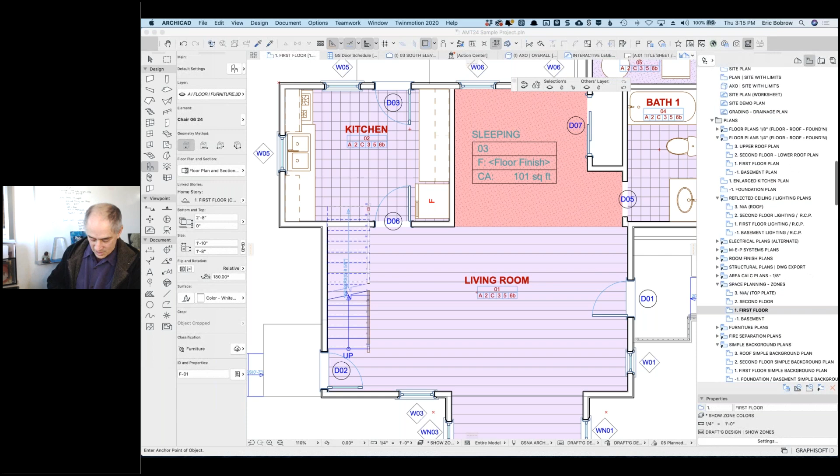Let me just put this back to a sort of more normal view here. And no, you're not supposed to bite my buttons. No biting buttons. Okay. Can you imagine if I ever had transcripts done of these coaching calls, and in the middle of an explanation it said, no eating buttons. You'd go, what the heck is going on here? All right, but my little puppy.

All right, so what do we mean? Let me open up your line, Martin. Martin, I have just opened up your line. Yes, hey there. So where are you located, Martin? Sydney, Australia. Okay, excellent. What part of the country? Sorry, what part of Australia?

It's located in a place called Burwood. Okay, all right. I don't know where it is, but I'm sure there'll be other people who will go, oh, I know that area. All right.

Yeah, all right, so you want to know about transmittals and updating them each time drawings have been sent out. Now, transmittals are an area of ArchiCAD that I only know in theory, and I only get a chance to look at it or talk about it once in a while. But by coincidence, just yesterday, I was looking at transmittals in the ArchiCAD Best Practices 2020 training course. So it happens to be relatively fresh in my mind.

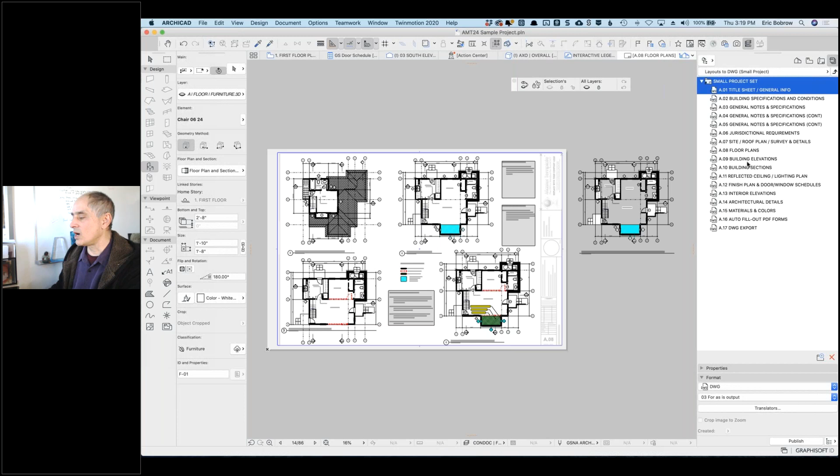Let's just do the simple one and say I want to print out the following sheets. So I can say that this is layouts to DWG, and let me go to layouts to PDF here, do a similar one, and say that I want to send these out. I can publish the selected items, or I can publish the entire set. So when I publish it, it goes out of the office.

Now, is there a record of publishing it? Not directly. This just simply does this for me, and there's nobody who's written down a note saying it was sent, or it was saved, or we want to make a milestone or a record that this went out.

So what is a transmittal? A transmittal is something that you define in the layout book settings. If I right click on the very top item in the layout book area, you can see there's book settings and there's create new transmittal set. I don't know all the ins and outs of transmittal sets, but I'll answer a few basic questions here. If I say create a new transmittal set, I give it a name here, so we'll call it bid set 1 or something like that. Right now it's in progress, meaning that I'm creating a name for it, but I haven't actually closed it or issued it. So I'll say okay, it's in progress.

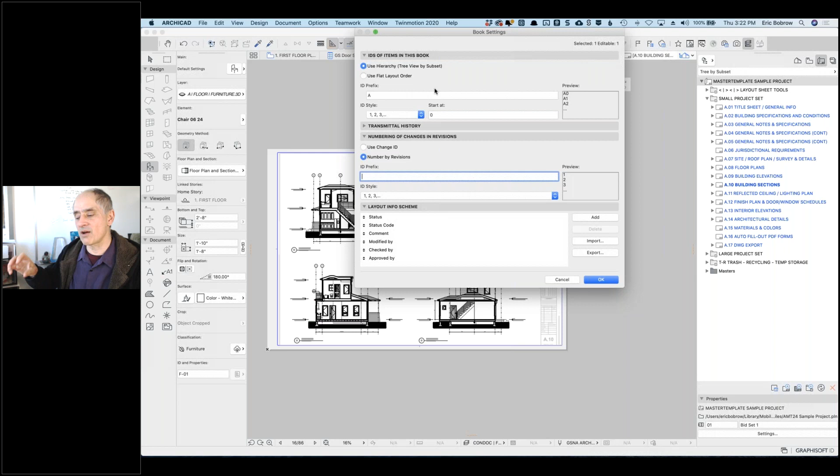So let's look at this very generally, and I won't go into detail for two reasons. One is I want to cover other questions, but the other is I only know it up to a certain level of detail, unlike other parts of ArchiCAD. So we have some things about how the numbering of the sheets are handled, although you can also override that based on groups, subsets that have 100 series, 200 series, etc.

Then next we have transmittal history. This I named bid set 1. It is in progress, it has not been issued, and it includes currently all of the sheets in my layout book, at least in theory. Now I have some of them that are just in the trash and recycling area, TR. I have some that are structural, that let's say I'm not outputting structural right now. I can right click, or I can actually highlight these and click on the X, and you can see they all disappeared from there.

Maybe I'm not including the details here in this one, so I remove them. So these are the sheets that currently are in this transmittal set. Or maybe, you know, I guess these are also some sort of organizing tools. And really all of this stuff down here is not in it. So my transmittal set is just these particular ones.

Now, if I go and publish this and output it, I can close the transmittal set. If I click close transmittal set, you can see bid set 1 was transmitted on today's date, March 25th, 2021. So this is now closed.

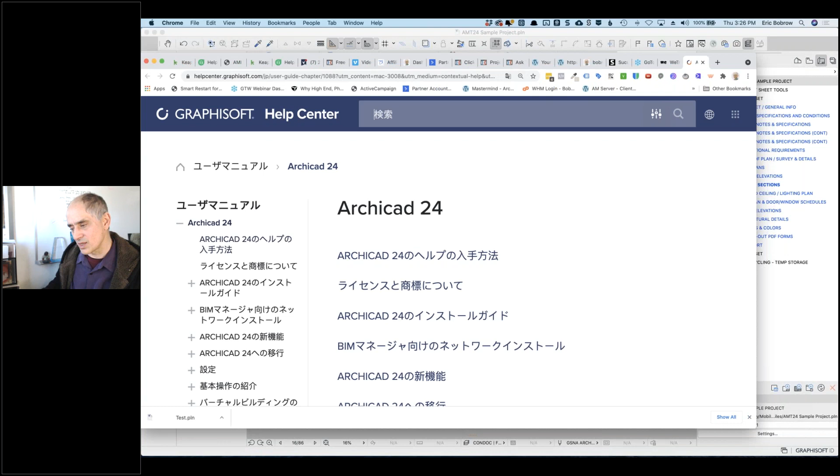Okay, so obviously you can look in Graphisoft's help. I would recommend going to the help menu, ArchiCAD help, and look up something like transmittal set. User guide, managing transmittal set. Create a new transmittal set, here's a little video. Yeah, I'll take a look at that. So now you know it's located in the layout book settings, right click on the layout book heading, and then you can manage those.

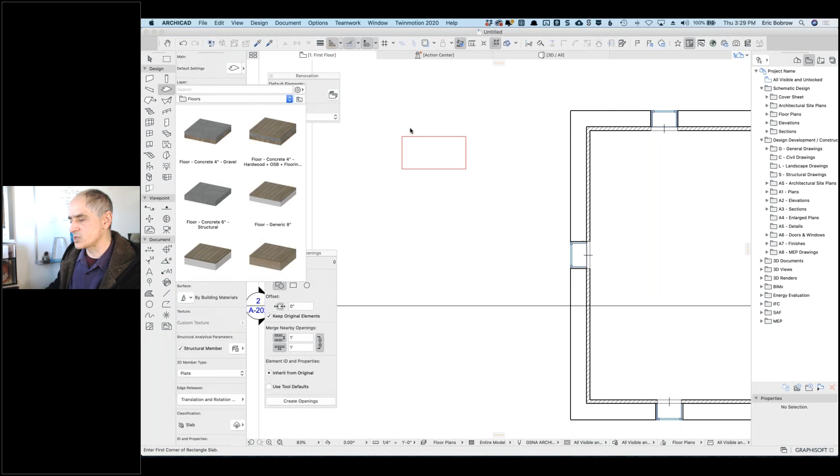I'm going to do it with the slab tool instead. I'll take the slab and make this very thin, made of wood structural, and it's not going to be 10 inches, we'll just say it's 4 inches high, just to be arbitrary. All right, so I've now got a flat slab there.

I'm going to select the polyline and use the offset all edges, and we'll take them in, let's say 4 inches, just to be arbitrary. So that is a line. This is the slab, and I'll go and cut a hole out of it with the magic wand. So you can see the slab now is a frame there.

And then I'm going to add another slab, going from the top, 4 inches down, and we'll say it's just going to be a half inch, made out of glazing, glass clear, and I'll put this in here. All right, so this is a very simple shape. Let me just take this and we'll look at it in 3D.

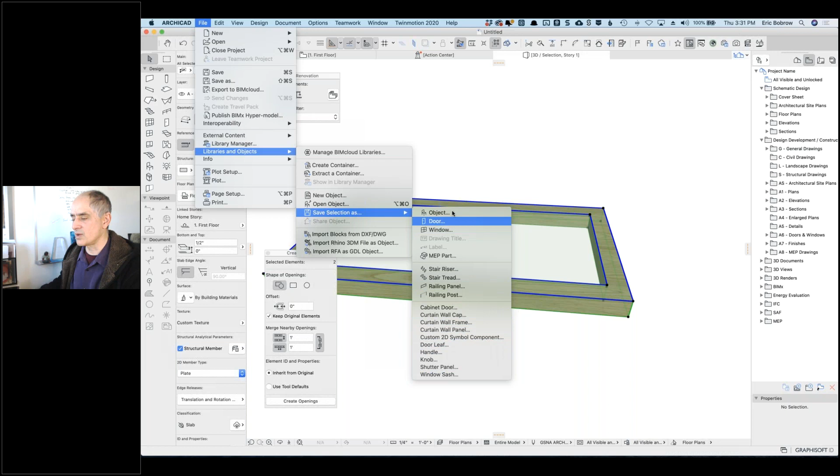Okay, so we have a frame with a piece of glass inset into it. I'm going to select all of these and go to the File menu, under Libraries and Objects, and save the selection. We have various choices here, but we don't see skylight. I'll save it as an object, take the top view as the floor plan view, say okay, and call it skylight test 1.

Right now it's going to go into this little project in the embedded library. It records some of the things like it was made out of wood, structural, and glass, and it used certain pens. I'm going to leave those alone.

Now if I go to the object tool, zoom out a little bit, and click, you can see something very similar, but this is the skylight object. Now I can't tilt it easily, because objects don't have automatically built in something to tilt it, and it won't automatically cut a hole in the roof. There's a variety of things missing in terms of making it a skylight.

Now let's look at how a skylight works in general. We have a little building here, and I'll go to the roof tool and say I want to do a set of roofs. We'll say they're going to be on the second floor, but also show on this story, and we'll just do a box like this. Now if I go to 3D, show all, here we have a simple roof.

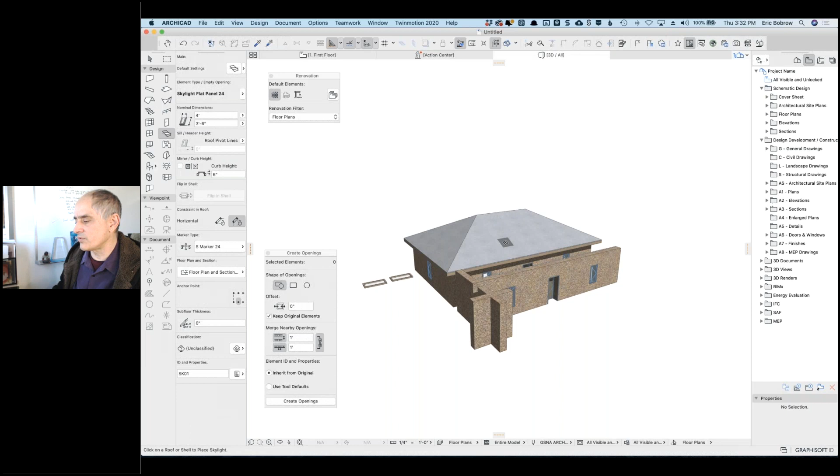Now if I go to the skylight tool, here's skylight, and I just click on the roof. You can see it instantly placed something at the right angle, and it has certain complexity there in terms of it having a frame and all of that.

The skylight tool has a number of different skylight types that you can do, but regardless of what type it is, one of the things it does is automatically match the slope of the roof and cut out a hole. You can see there's actually a hole in that roof as opposed to seeing the roof underneath it.

Now if I were to change the roof to a different slope instead of 6 and 12, let's make it 8 and 12. You see the roof changes and the skylight adjusts as well. So I'll undo that - that's what makes the skylight different. Also, if I were to take the skylight and drag it around, you can see the hole disappeared and the new hole comes in.

Now, how do we get this as a skylight here? Well, I can select this object first, go to the File menu, Libraries and Objects, and say I'd like to open this object. So this, instead of opening the object tool, opens the object definition.

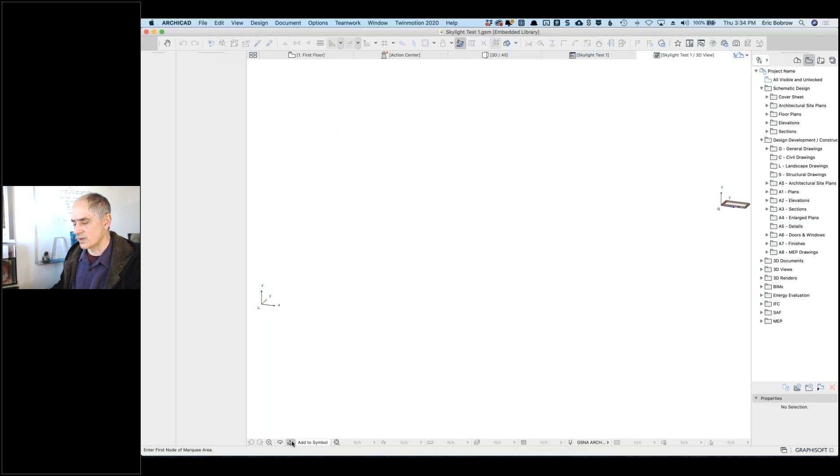Now the object definition is a dialog box that some of you may know pretty well, others may not know at all. It has a whole lot of controls here. Let me close up this. If I go to the 3D, there's this whole script here. So what the heck is this? This is something that says draw a bunch of prismatic forms with these coordinates, do something else, etc. And ultimately we end up with this thing - this is the object being visualized, and this is how it was being constructed.

Now, one of the things that allows us to apply objects from one type to another is what's called the subtype. So here we see in the details area something called select subtype. Right now I just said I drew some stuff, saved it as an object, and it says it's a model element. Now model elements can be all different types of things - it can be a building element, it can be a beam or a column.

It can be something more like furnishing, a bed or seating or things like that. When you decide what it is, ArchiCAD will treat it somewhat differently. If you make it a certain type of equipment element, it may have fields you can fill in for an equipment schedule, because equipment has a manufacturer, a serial number, and some other attributes.

In this case, I'm going to change this from just a general model element to... let's see... covering? No, it's not a roof covering, but it could be something there. It is an opening, and it is a roof opening, and it is a skylight. So I'm basically looking around until I find something and say, oh yeah, that's what it is.

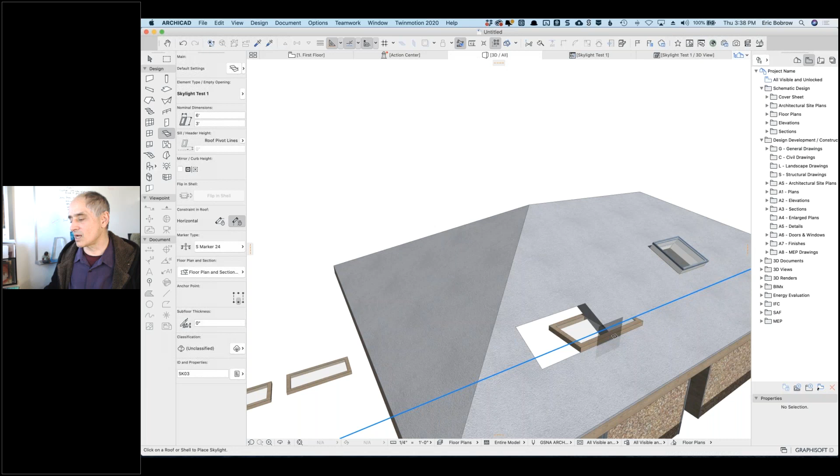So what I've just shown you now is, I don't know, we could call it half of the process. I'd have to look a little further to see what you need to do to make something a truly usable custom skylight. But I'll point out that it already has a hole of the right size, and it's already placing an element with the skylight tool. We just need to get it to tilt and be anchored in the right way. So I can look into that and possibly respond to you via email, or create a little tutorial on it. I don't think it's worth researching it during this session, but I've shown you half of what you need to do. So Mark, let me know.

So I see Romerick just logged in a little while ago. All right, so you wanted to save a roof vent object as a skylight for easy placement, and you said, thanks, this solves it. You can work with it.

Okay, so if you have an object that already is in the library, what you would want to do is save a copy of it, then put that copy in your embedded library. Then you can edit it and change the subtype. Now, maybe it doesn't need to cut a hole, maybe it's just going to drop onto it. But there would be some scripting needed to make sure that it can tilt automatically, and that's something I'll have to check.

A lot of stuff you can do in ArchiCAD simply by pointing, clicking, and placing, but there are some things you may need to script. There may be just a line of code that says rotate this object based on the roof it's going into—probably one line of code, but you have to know exactly what it says. So it was missing from documentation. I can look into it, and we'll see. So we got it partway. Thank you, Mark.

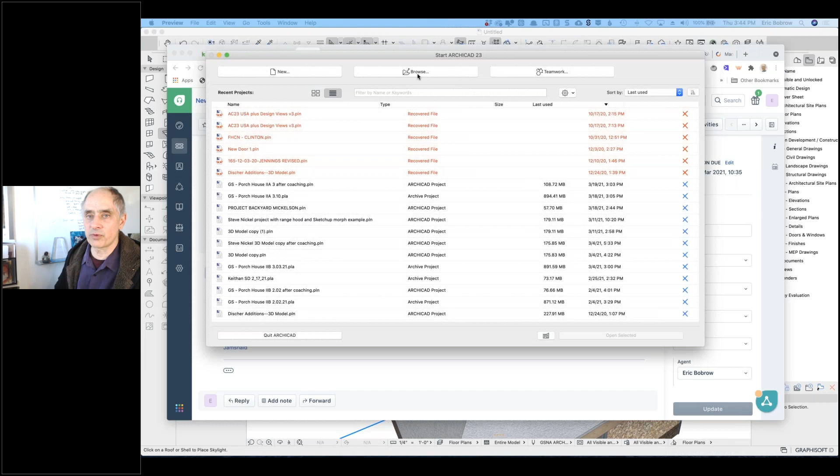Hi, Baba. All right, so I'm opening up your test file.

Conrado says the same is happening to me. So that's interesting, let me open up Conrado's line and we'll see. So Conrado, you've had the same issue with this part. Maybe it's a bug, in which case all I can do is discover that it does the same thing for me, and then possibly suggest a workaround if I can figure it out.

Okay, so we have a couple of labels here. We're on this story, it looks okay here. Let's go up to another story and come back down. So I didn't see a change there. Try changing the scale. Okay, so right now we're at 1/4 inch to a foot. Let me just zoom in and out - no change there, so not changing the scale that way.

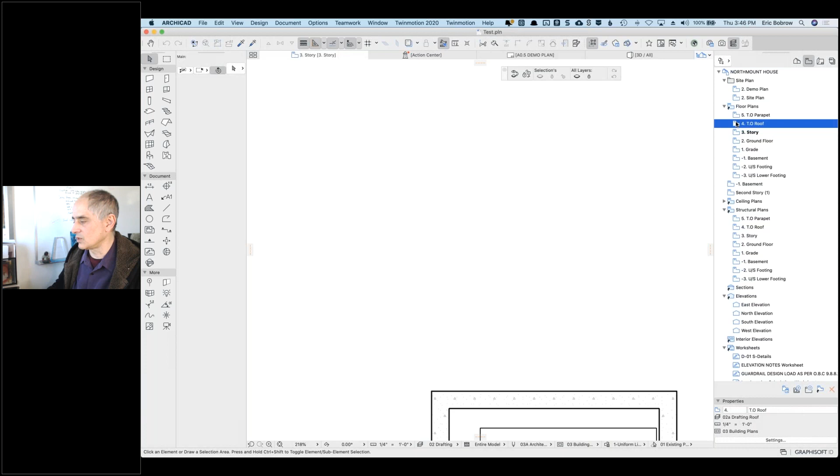So not a problem for so far.

Now let's see what settings there are here. First I select it, and we can tell there are some handles here that I can move around. If I go to this handle, can I reposition it? Yeah, it looks like I can, so I can move these things around. Looks like this distance is sort of locked in there, but if I grab this one, I can stretch it out. Okay, so those are all parameters.

Now as I'm moving this, you can see there's something that says distance, right? In other words, the distance is indicating something. I could put it in numerically, so there is some information that's being retained numerically, as well as just moving a point in space.

If I open up the settings of it, here it's called property label. We can see a preview of this. You can see that the pointer is checked, so that's what's giving us the leader line there. It has some options for how the angle is going to be. In this case, I just moved it around and it's 74 degrees going up here.

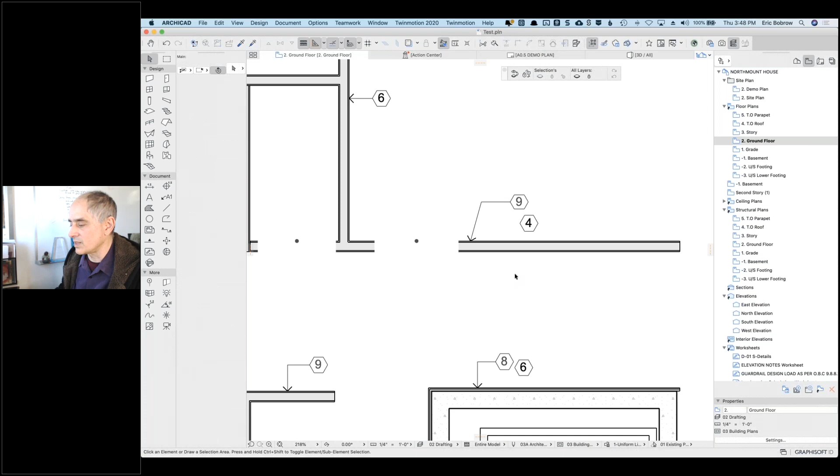Yeah, so I'm not seeing the issue that you had there. Now you mentioned rebuild, so under view, refresh, there's rebuild, and you said that sometimes that works but sometimes not. I think if I hold down the shift key, you can see that command changes from rebuild to rebuild and regenerate.

This may help ArchiCAD reanalyze what's going on and clean things up. I've seen that historically for some things that just didn't update the way they were supposed to, and the rebuild and regenerate - that's under the view menu, refresh, and then press down the shift key and you see you have this option. Obviously I'm not seeing a change here because everything's working, but for you that might help.

Okay. So is there anything else that I can look at here? No, this was the only thing. I can give it a try and see if it works. Okay, well, good luck with that. I'm just seeing if Conrado, who had said this is happening to him. I've opened up your line, Conrado.

Eric, the same thing happened to me, but the refresh is not working. The refresh does not work? No.

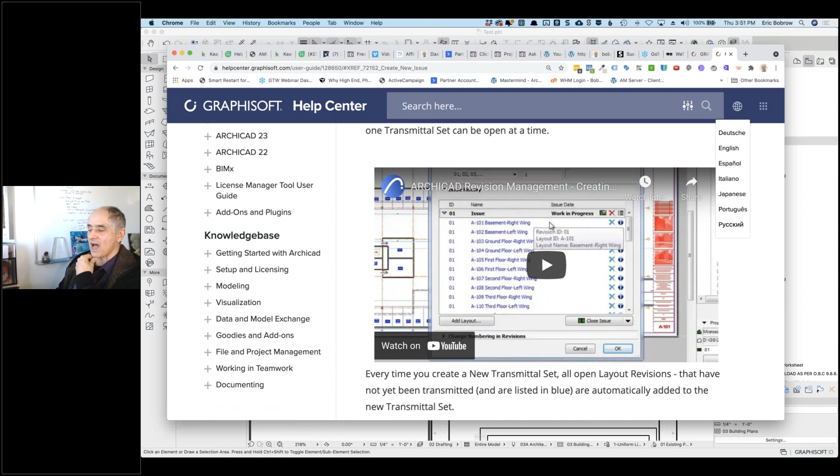Yeah, I don't know what's going on with Graphisoft's site. As I mentioned at the very beginning of this session, my own websites were hacked today, and I don't even know if they're all up and running, but things happen online - it is weird. So I doubt this is a hack, but there's something that's just not set properly.

All right, but you are on a Mac? I'm on a PC, and the same thing is happening. So okay, it's not the version of the program.

Now one thing I want to check here - I'm in ArchiCAD, let's see, about ArchiCAD. Okay, 5005, so I'm in 5005. Go under help and check for updates - it says I'm in ArchiCAD 23, and it says my ArchiCAD is not up to date. When it's up to 7,000, that came out just literally 3 days ago. So question for Conrado and for Jamshed, what version of ArchiCAD 23 are you running?

I'm in 24. Oh, you're in 24, okay, so you have the same issues there. And Jamshed, I think you mentioned that you were in 23. Yeah, 3,000. You're in 23, and your build is 3,000.

3001 or something, okay, I can check. In general, you should make sure your ArchiCAD is up to date. So I can download this now. It'll go and download it. I won't install it until after we finish today, but it'll download it and you can double click to install it. You'll have to quit out of whatever project you're in, and then you can install that. Interesting, it didn't tell me I was out of date. Let me switch over to my ArchiCAD 24 and say help, check for updates.

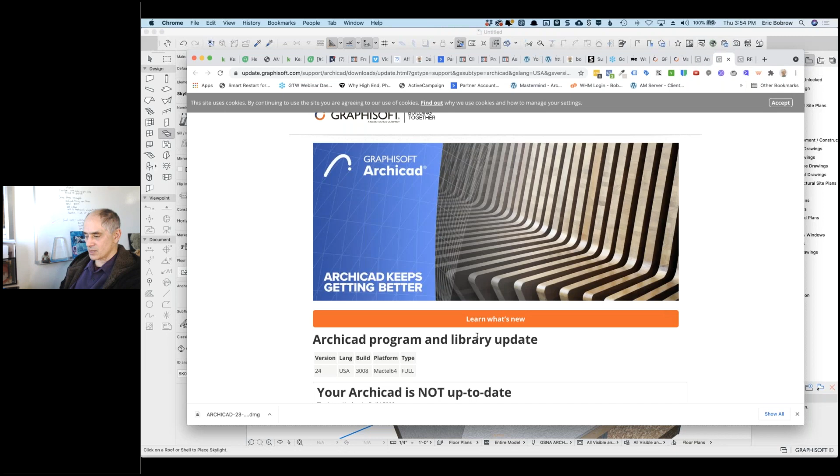Now this is for 24. Interesting, why is it talking about the geometry exchange update? That's not what I'm caring about there. So it's like the 24 menus here. So we're in 24, say check for updates. And yeah, it is. So there's some odd things because it's coming up with this. On the 24 check for updates, it came up with two things at the same time. Actually it didn't duplicate it the second time I did it. So I don't know why it brought this up, but it's saying ArchiCAD is not up to date, and again there's an update from 3 days ago. So I will update this as well, and the library is also not up to date, so I'm going to go download these. Fortunately I have very fast internet and it usually goes pretty quickly, but I'll do it after. So I would always check on that, because if you have something strange, bring everything up to date and see if that fixes it.

So I'm looking at comments here. Jacek Leshevitz, hi Jacek, thank you for your comment. It says thank you for these seminars, there are a lot of helpful hints that I would not think of asking you about that teach me something each time I attend them. Really appreciate your time and input. Appreciate that, Jacek. And Ian Reed, you're an excellent communicator, dealing with problems on the spot is a real skill, well done, thank you. And Jerry Sperling, very helpful, I can only handle all the info once a month. Yeah, it is, well we sometimes cover a lot of things. Peyton Monty, you say you're introduced to ArchiCAD 2 months ago, I watched your training videos which helped with the basics, this was my first ArchiCAD webinar, very interesting, appreciate you taking the time to help people learn, I'm sure I will have more questions down the line, but you're a great teacher. Thank you, I appreciate all the feedback.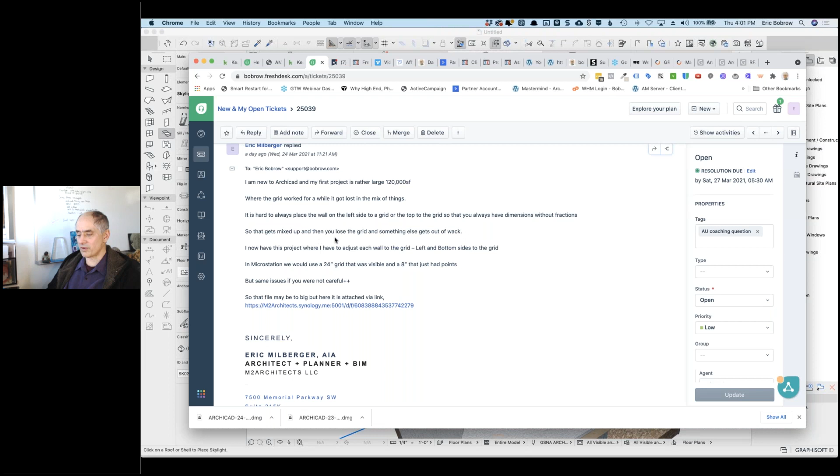Is Mark Renz by any chance back on? No, he's not there, but I could look at that. This was a different type of question. Cinda, I think this is going to require being with her, I know she was driving, so she wasn't going to be able to be on. All right, Eric Milberger, by any chance, I don't see him on there either. So we have those two, Eric Milberger and Mark Renz, that I could explain things to and then just point them to the recording. Let's see, Eric Milberger, oh yeah, this is the one with the grid, and I think it really would benefit from him being here, particularly since he's new. So I'm going to wait on that.

Now the other one was Mark Renz, who needs some help. Foundation wall wants to show up in my foundation plan, however it doesn't. I've changed the walls to show footings, but they do not show on the foundation plan. All right, well, maybe I can look at this. This has to do with visibility of elements. I think I might be able to help.

So here, version 24, download, named Kolluri, okay, and we'll go to this 24 here. I don't think I need to save this, I'll just save this as ACP 2021-03-25 work file. In case for some reason we want to open that up again at any point, I have that, even just to check out how to make the skylight work.

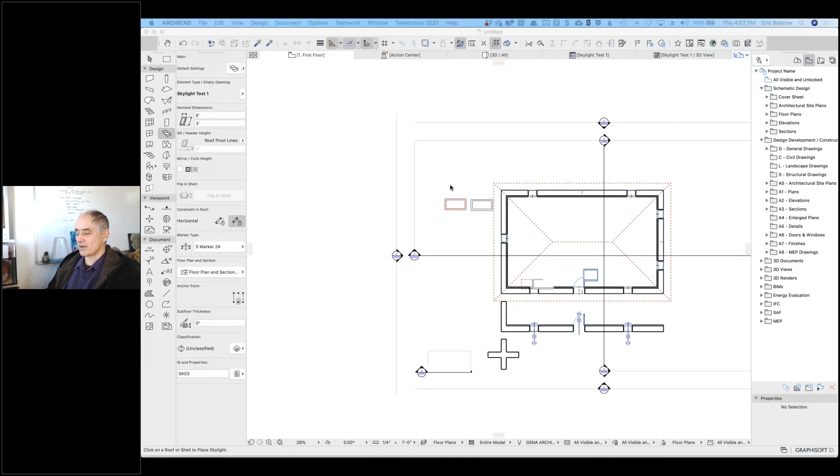So it's just saving it, and I'm going to open up his file, and we'll take a look at visibility of footing elements on the foundation plan. I may ask some of you to give me some guidance, since Mark is not on the line, if I have questions about interpreting what he's saying. So we're going to say open here, and it is Kolluri. I've already saved this work file, I believe.

So, how are you all doing there? I see some comments. Michael Stetzer says, I got a message when I tried to go to your website: the requested URL was not found on the server. Yeah, I've been having some website problems today, so I apologize, thank you for mentioning that. Yeah, it may still be down.

Surain Gunasakara says, thank you so much for the training session, super appreciated. Steve Pribble, hey Steve, thanks. All right, Doug Muir: your workshops are great, I don't have many colleagues who use ArchiCAD, so they're fun as well as quite practical, answering questions I never thought to ask. Many thanks. You are welcome.

All right, Jamshed, you have another question: if a file becomes corrupt, what's the best way to copy the project to a fresh file? All right, well, we can look at that. Let me just talk briefly. There are two cases that are very distinct. If your file is so corrupt you can't open it, that's one thing. On the other hand, if you open it up and it's there, but you think something's funky in there and you want to get it over to a new file, that's a different situation. So in one case, if we go to the file menu and I say open and select something like this, there's an option to open and repair the selected file.

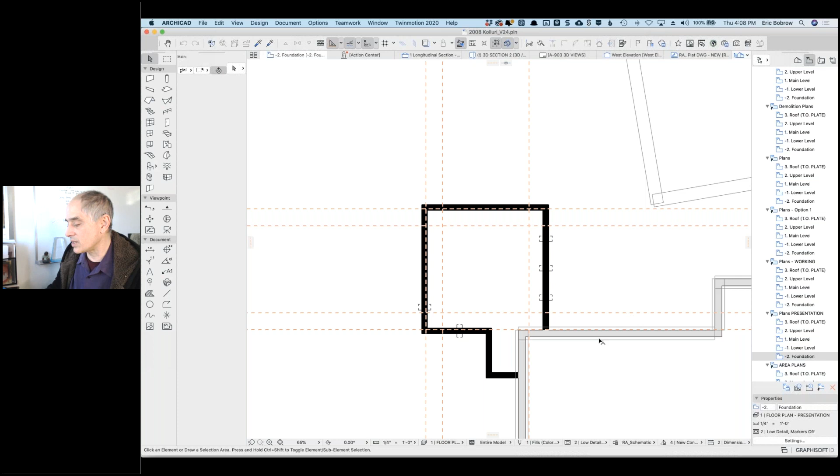Unfortunately, since he's not here, I don't know - is this existing and this new? Let me guess here. This is structural footing. It's saying that it's going to show projected with overhead, whereas this element looks like it's a little piece of wall, not the whole wall. It is symbolic cut.

Okay, all right, so if we were to change this to projected with overhead, we can see that it sort of disappears, or we just get some lines there. And I'm not even sure, are we still seeing the wall? Yeah, we are still seeing the wall, but we're seeing it in a different way.

So one thing that we have in ArchiCAD is the concept of a floor plan cut plane. When you're creating a plan, in symbolic terms you're saying, what would you find if you were to cut through this building at a certain level? Generally in the US, it would be 4 feet. In international use, it might be 1 meter or 1.1 meter, I can't remember - but basically chest level. That cuts through most windows and doors, and so when we see the wall, we see the basic framing of the wall, we see the fenestration there. Now that is when we're looking at this - I select this element here.

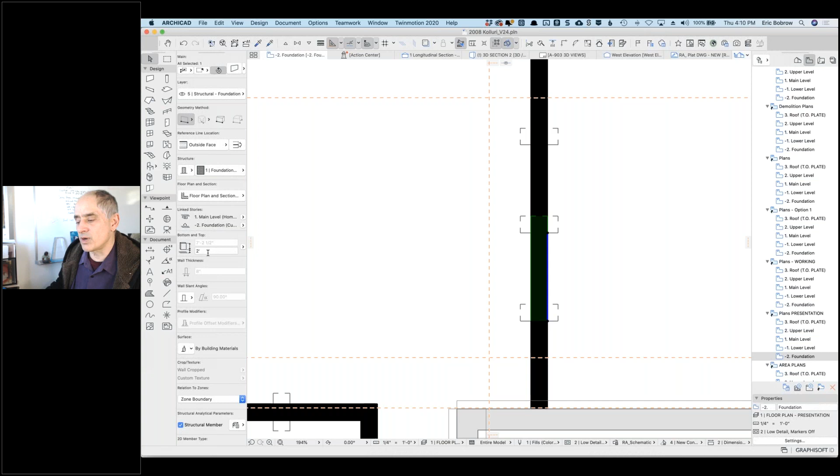So symbolic cut looks like this. Now what is the height of it? This is going from -8 feet 4 to -1 foot 1.5 inches in relationship to project 0. Now if I'd say, what is it in relationship to the current story, the foundation level, we say height and home offset. It says it's going from 2 feet off of the foundation story up to 7 foot 2.5 up to the main level where it's linked. So it starts at 2 feet above the foundation level.

Now let's see if I take this one. It says this one starts at 0 relative to this one. So it actually starts lower than this one.

Now let's take a look in 3D and see what's going on. So I'm just going to go and do a little marquee around here. Now I've got a heavy marquee, so it's going to show the upper part of the building as well, because it's going to show all stories, but only the layers that we've got turned on. So I don't know what layers are turned on. So I'll just say, with the current layers, show just what's in this marquee.

And it says errors occurred during last operation. I don't know why he's getting errors here, but obviously we are seeing what looks like a pretty well fleshed out design. Now here we see we've got a wall at one height.

We've got a beam below that. Okay, so this is a wall 0 here. This is the wall 2 feet. All right, so this is the wall that we were looking at, I believe, and we were cutting through at a certain height. Now that I understand this, let's just rotate it around.

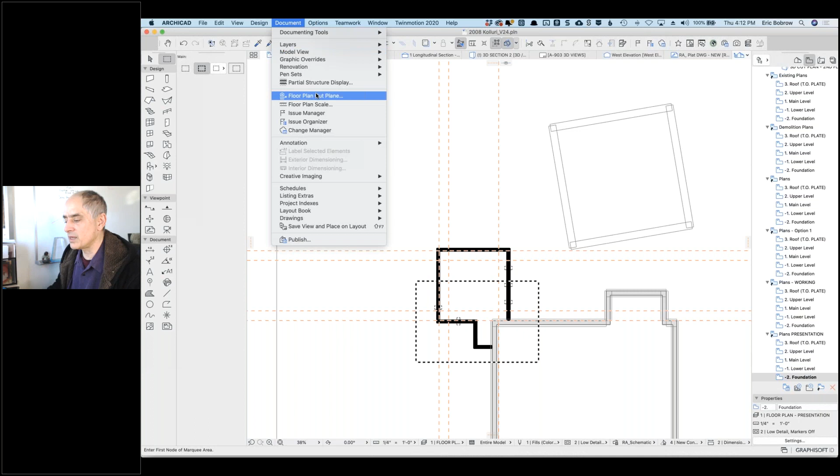Now let's look at the document menu, floor plan, cut plane. So the cut plane is something that I can change anytime I want, and it is recorded in a view. Right now it says that it's cutting 4 feet from the current story, and I'm on the foundation story, and it's going to show things. This is sort of a standard thing.

Well, let me go and take these walls. I want to do all of these walls. I'll just use the marquee tool with the thin marquee, go to the wall tool, and say select all the walls that are in that marquee, and we're going to change them to the more common thing of floor plan display. Oh, interesting, we have some that say overhead only. So we've got all sorts of stuff that he's got in here. So 10 of them.

So yeah, we can see that there are some that are showing overhead. So let me just change this and we'll see what happens. What if I put these all on projected with overhead? You can see how it's changed a bunch of stuff there.

Now what if I go to the floor plan cut plane, and change this, go down to 1 foot above the story? I don't see a change there. What if I go to floor plan cut plane, to 6 feet above the current story? Okay, I'm not seeing any change there.

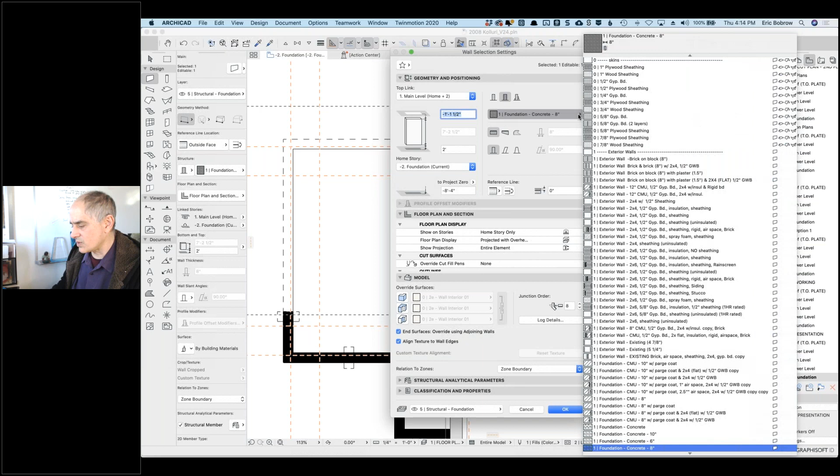That's the other thing, is what is it made of? It is foundation concrete, 8 inches, projected with overhead, and cut surfaces - override them, no. Override cut fill pens, no, okay. Outlines, cut surfaces, show entire element, home story only. This is on the current story here.

So let me just change this temporarily to cut only. You can see that it actually disappeared. The dashed line disappeared. So let me undo that. It looks like it's above the cut plane.

When I say cut only, it's not seeing it. If I change this to symbolic cut, we have a clean result there. That's what he was doing. We change it to outlines only, and we get a more solid representation rather than the dashed lines.

Without spending too much more time on this, when you have stepped foundations, or a split level with different things at different levels, there can be challenges representing things on plan. One standard way to deal with it is to say, instead of trying to do a projection cutting through it, let's just do the symbolic representation.

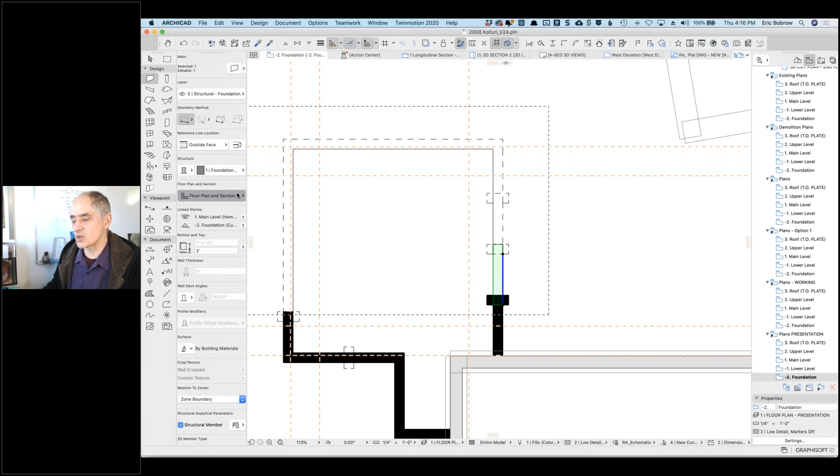So the question was, is this a bad thing to do? I'd say no, it's not a bad thing to do at all. I don't know if this is the best way to do it here, so I don't quite understand why the projected one isn't working. I'd have to think about what's going on. But symbolic cut definitely is reasonable.

Now, what's the difference between a symbolic cut and a projected cut? If the element is going straight up and down and has a uniform composition, whether it's simple concrete or multiple skins like cladding, framing, and interior drywall, but it's all the same, then it doesn't matter where you're cutting—if there's no door or window, the symbolic cut will be identical to a projected cut through the body of the wall. Now if the wall is shorter, like a curb or a very low partition...

...then when you do a cut at 4 feet, you might be seeing the top of the wall below instead of cutting through it. So that may be something you want, or you may want to say, just give me a symbolic cut as if I was cutting through it.

On the other hand, it might be above the cut plane, like a soffit made with a wall tool, in which case the symbolic cut will not show anything unless you say symbolic cut plus overhead, and then we'll see some overhead lines. But again, you can force it to use symbolic cut and just show it as if it was at the same level.

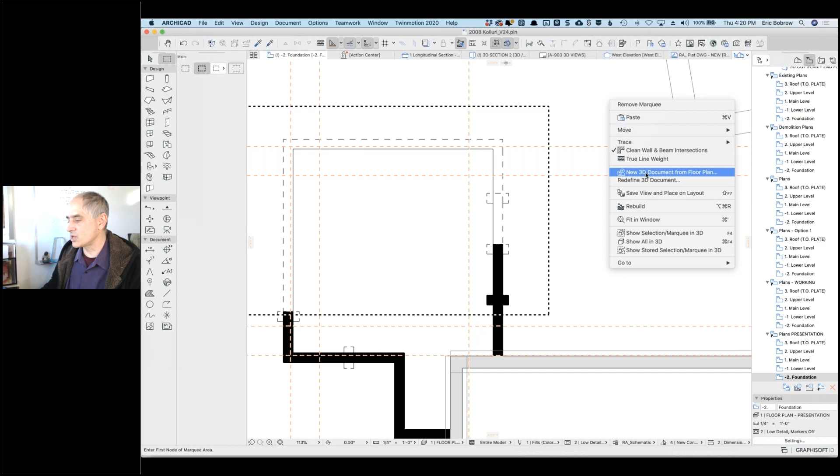So now we're seeing the walls, but we're not seeing the footing, because right now my marquee is a thin marquee—it's showing only what's located on the story. If I switch to the marquee tool and make it a thick marquee, and then say show what is inside the marquee in 3D, then of course we get all the upper stuff and we get the footing here.

Now the footing says it's on the home story, the -2 foundation, which I thought was what we were on, -2 foundation. So I would think that that would show up because of the marquee. But let's just see—this says home story only, projected here. So let me go and change this from projected to hybrid mode. There's some interesting things here.

So this is a beam, and it's showing some interesting things. This projection mode hybrid I've never seen before—it must have been introduced in either version 23 or 24. Let's just change this from projected to outlines only here. I've just done it for one of these, and now let me go to the plan.

And I don't see where that is. If someone sees it, let me know—I don't see something like what I just had. This is wider than that.

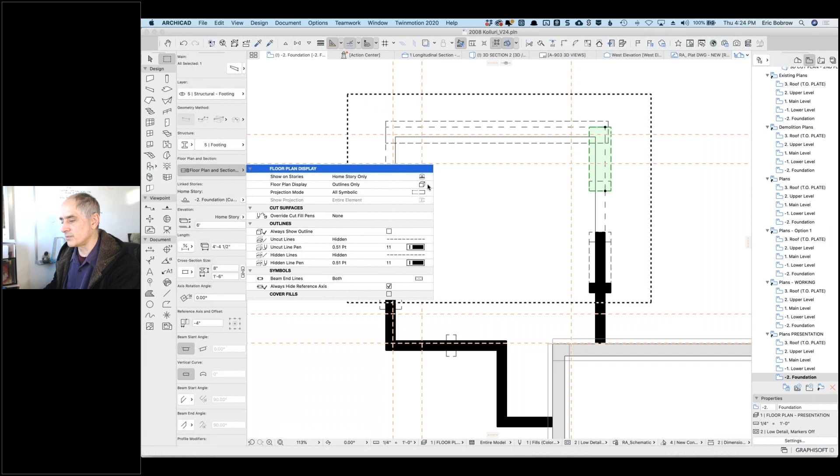Now, if I have this selected and we go to, instead of outlines only, we go to projected, it disappears. So let's undo that. If I say, excuse me, projected with overhead, it's still visible. So it's overhead for a particular context—projected would mean just what we're seeing, what we cut through, and anything below. Projected with overhead allows us to see something that's above the cut plane.

Now, I'm a little puzzled about this cut plane because it says it's four feet above the current story. Maybe I was changing it, but let's just make it 3 feet to see if this changes anything—1 story above, show down to current story. Yeah, okay. So I'll have to say this would require some more study. Clearly, I've identified some display options that can allow things to be seen: changing from projected to just outlines, or projected with overhead, did seem to allow these footings to show.

Okay, it says often I just draw the 2D line work instead of struggling with the display issues. So I understand that—I'd have to go into it a little bit more in depth to understand it. And I've been going for 3.5 hours.

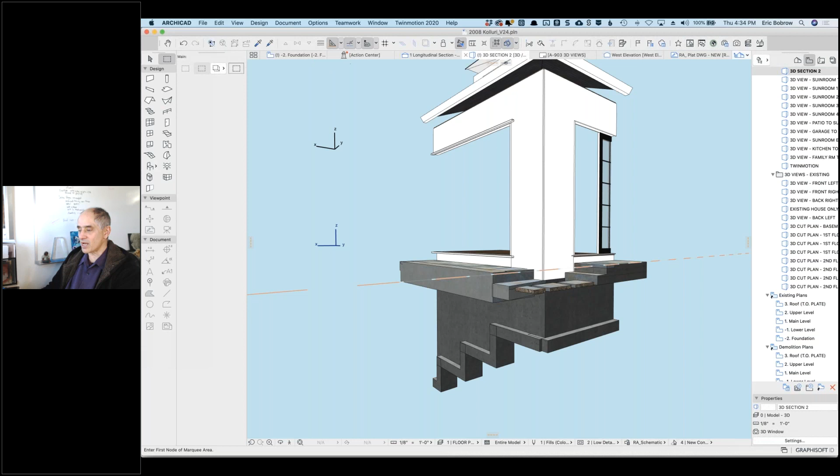Now, one thing I didn't look at is if we go to the section here - that's actually a 3D section. But if we go to the longitudinal section, let's see what we have. This longitudinal section doesn't seem to have anything in it. Might not be defined properly, or the layers - layers are all off. I don't know what we have here. Let me do something really arbitrary - I'll just cut a section literally on a diagonal through this, like that, and see what we have. Open section in new tab.

Okay, one of the things that will help us is to look at the stories. Now this is something I hadn't noticed, and this is potentially the cause of the issue. You notice there are two targets here - they're only 4 inches apart, right? That means if I go into the story settings, the lower level is -10 and this is -10'4". So basically when we're on the -2 foundation, we've only got a 4-inch sliver that we're looking at.

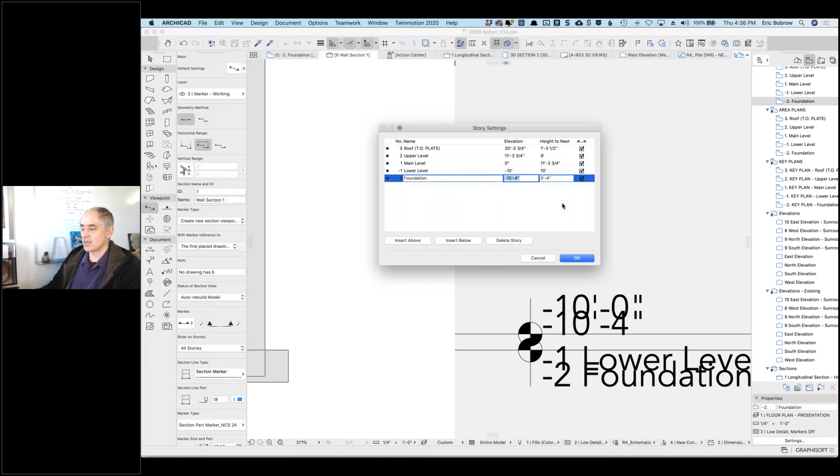Now I'm going to do something wild here - I'm going to take this down to -15. So what that'll do is anything that has a home story of the foundation will float down to -15 feet 4, because it was 10'4", so it'll float down 5 feet. So we're going to have the project break apart suddenly there. I'll say okay, we're going to see this update here in a second.

You can see here now it goes down, and these elements that have floated down - well certainly this floated down, I'm not sure. Of course I've messed up the model, I don't quite know what's going on here. But I bet that's part of the cause of the issue - the story elements were basically constrained to only trying to show a slice of things.

Now if I go to 3D, let's just see - have I messed up the model entirely? Oh, ArchiCAD bailed. Okay, I think that's a good point to finish, but at least I identified by my natural curiosity, saying let me look in a section at what's going on, what would certainly be connected to the issue.

And the issue is that the story elements aren't within that volume of the story. So you have to really carefully look at the element settings to make it work. That's why the cut plane thing was not working, because we were saying 4 feet above the story, but the story was only 4 inches high. So it said only go up to the next story, and of course the next story was only 4 inches above. So that's where the problem was.